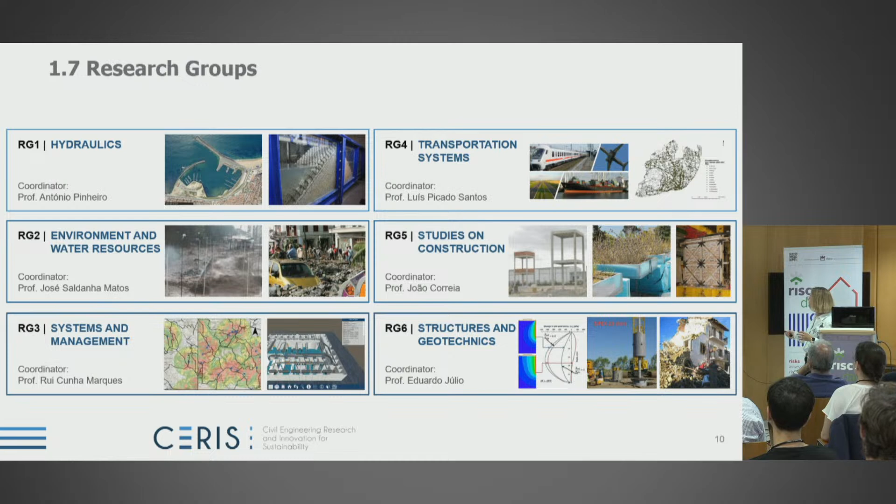We are organized as members, collaborators, students and grant holders, and each of us belongs to one single research group. They have different sizes - the largest one is studies in construction, whereas the others are more or less the same size, with the second largest being structures and geotechnics.

Then we have the 4 thematic strands. These thematic strands were thought of when we applied for the last FCT funding, and this was the best way we could define our research. Nowadays, we believe we have to revisit these thematic strands and eventually replace some of them with other concerns of our society, such as climate change, digital transformation, or energy concerns. We need to revisit this, and we will create a task force inside CERIS to think about how to organize and present our research in the next application.

So this is what we currently are. These thematic strands cross-cut the research in the six research groups. I myself am not just focused on one of them - I'm split among one or two thematic strands. For instance, my research is very much focused on risk and safety, but I also work in response to societal changes, and other researchers work the same way.

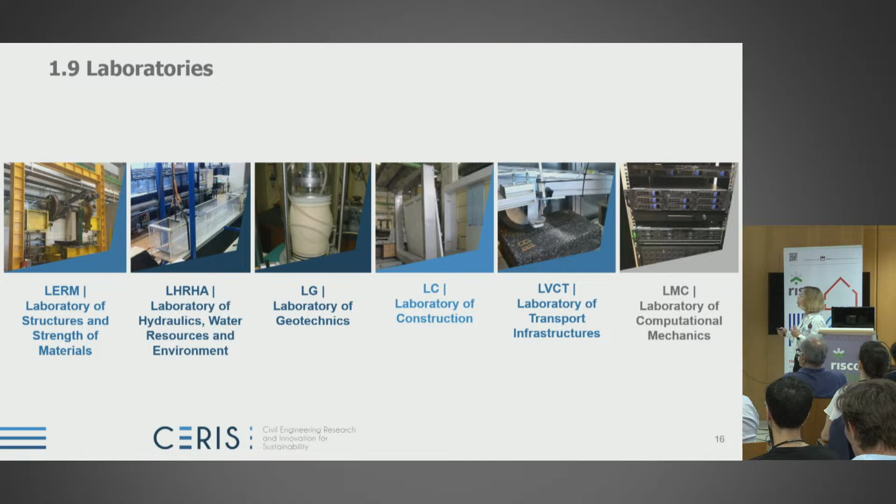Then we have our experimental and computational labs that support our applied and fundamental research. We have 5 experimental labs: the Laboratory of Structures and Strengths of Materials, Laboratory of Hydraulics and Water Resources and Environment, Laboratory of Geotechnics, Laboratory of Construction, and Laboratory of Transport Infrastructures. Probably you know them, you have visited them. You're very welcome to come and visit, and we can share our facilities with our colleagues. We also have the computational mechanics lab that has servers and gives support to numerical modeling in our center.

Last year we created 2 hubs of CERIS. The first one is Nova Hub. Actually, the researchers that belong to Nova Hub were already, most of them, CERIS members and collaborators. But because they represented a significant critical mass, around 25 to almost 30 people, we found it fair to create this hub in Nova School of Science and Technology. It was created in February 2022, and Rodrigo Gonçalves is now the coordinator of this hub.

We also have another hub in Coimbra.

This hub was created in April, two months later, and we believed that this partnership with them allowed us to reinforce the connection with industry, because they do lots of applied research and consultancy with industry. They have extraordinary laboratory facilities, space, and different installations and equipment from ours, because they have much more space. You can see the space here in Coimbra. Itecons has got all this.

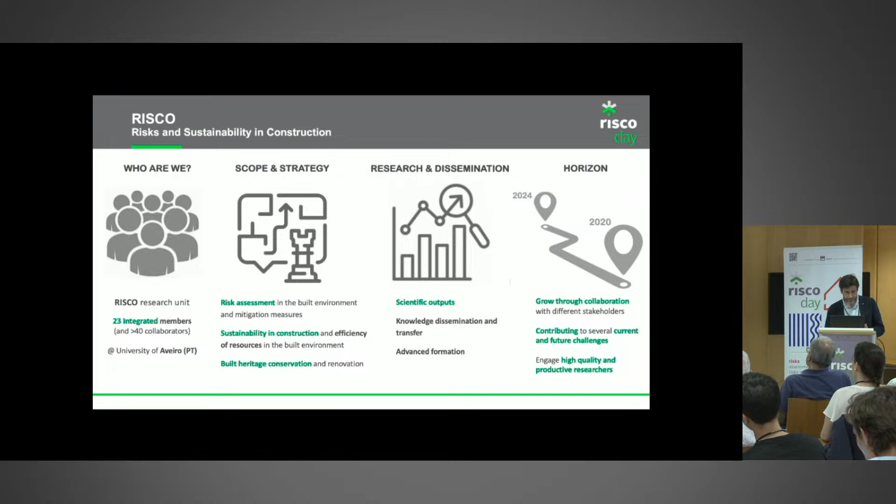So who are we? We're a small research group. We have 23 integrated members, but we have over more than 40 collaborators, including PhD students and doctors. We're actually in a very interesting ecosystem here at the university, where we have 16 departments and another 4 polytechnic schools, and an environment of 20 research units, all of which have been rated very good or excellent.

This ecosystem is very interesting because we have the opportunity to interact and have an interdisciplinary nature. As I said in my first intervention, last year we had 3 research units here, and this year we will have the participation tomorrow morning of another 5 research units. These research units have some research fields of common interest, and that's why this event is important to bring us together, even though we're in the same house and don't always know each other. So the idea is to continue this strategy of internal dissemination and interact more actively with other research units inside the University of Aveiro.

Our RISCO unit is in the civil engineering department. I would say that the civil engineering department is kind of like our nest, okay? It was created in 1996.

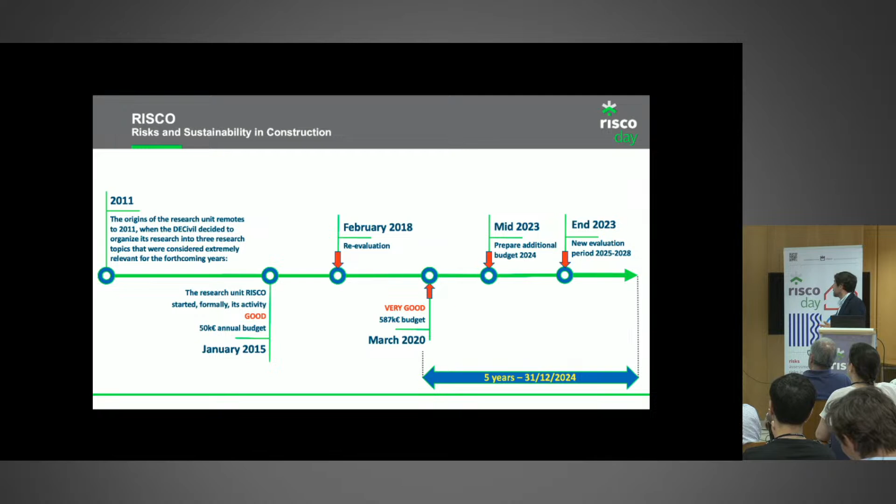Just to give you an overall idea of how we were created: we started formally our activity in January 2015, then got reevaluated in March, and we had a slow start on the execution of our budget. But 2 things are very important here: we have to prepare an additional application for a budget for 2024, and in the last trimester of this year we will be reassessed. Next month we will have this. We'll have to prepare this additional budget, and in the last trimester prepare our reassessment.

Our external scientific advisory committee is here today. I won't be presenting them, you've had lunch with some of them, so it's a pleasure to have you back. It was very interesting, our meeting this morning, because of the recommendations given, and as you said this morning, and I retain this phrase, you're coaching a good student. So RISCO research unit is a good student, and it's easy to coach good students, like good PhD students, right?

As I said, we're over 60. So we have a good percentage of women in our group. We have 30 active PhD students, actually a bit more, but these are the active ones that we keep a trace of, and we know that are working and are supervised by RISCO members.

We had a pickup on the PhDs that were concluded in 2022. You can see there were 5 of them concluded last year, and in this first trimester we had another PhD concluded. It's very interesting to see that our students, our PhD students, are mostly foreign students. This is something that I think is common in other PhD programs.

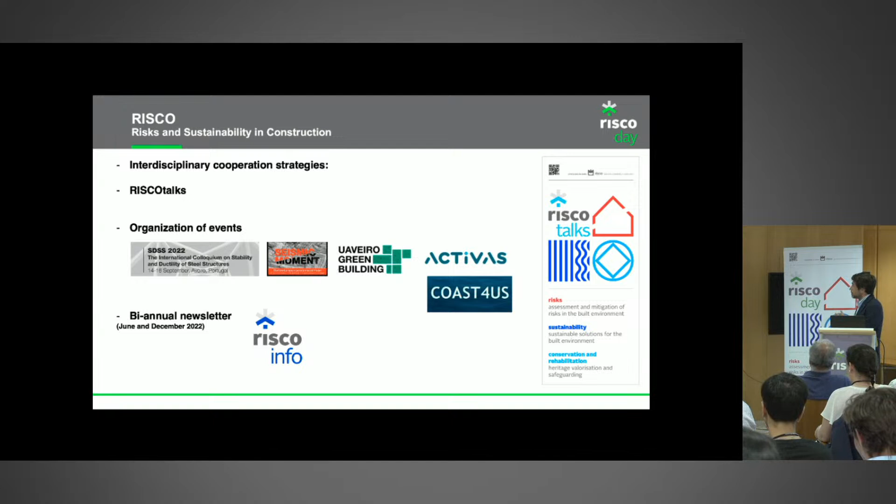So budget-wise, just as Dídia told us, it's broken down into 2 strands or two streams, a base and a programmatic. Just to stress that altogether, we, since the beginning, agreed on having a good investment in human resources, because that's where the production line is of papers.

It's exactly in good human resources, in PhD students, and in PhD researchers. So we have a very good share of our budget dedicated to human resources. Then we have another important slice dedicated to equipment that we bought. This equipment has potentiated a lot of work with PhD students. You'll see some of the presentations from RISCO members use of that equipment to potentiate new areas of research and to help in the research programs of PhD students.

We also had 2 scholarships that were only attributed this year, in the beginning of this year, under the scope of our funding from FCT.

In terms of infrastructure, we have a heavy lab on the ground floor of the civil engineering part, a lab on the 2nd floor, and a fire lab in another building at the university campus. We also have open space rooms for our PhD students and grant holders.

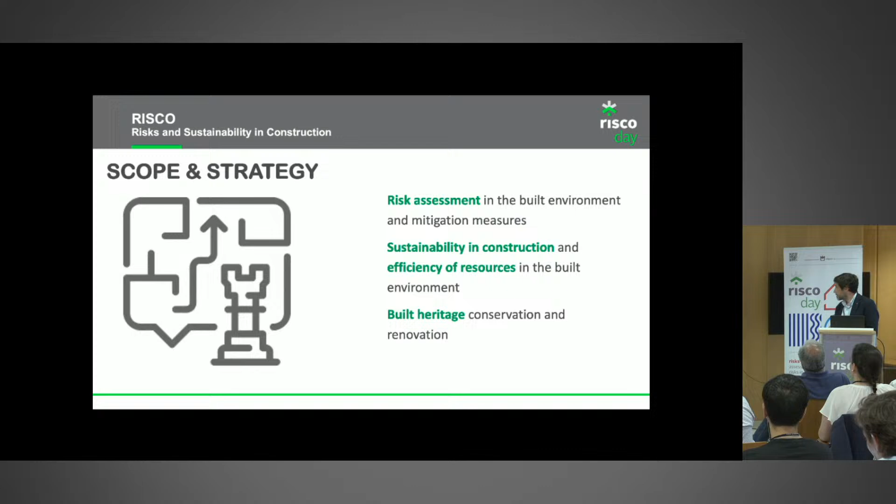In respect to our scope and strategy, we have three main research areas: risk, sustainability, and conservation of the built environment. RISCO focuses on promoting sustainable and resilient cities through safe, environmentally friendly, efficient, durable construction infrastructure across various areas, from new technology development down to smart transport and energy efficient sustainable mobility.

These strategic areas link most strongly when we talk about risks to natural hazards, and to anthropogenic, or man-made, hazards. We have a lot of scientific output in this particular research area, as you'll see in a moment.

Then we have a second research area, sustainability in construction, where a lot of work is being done on material science and the efficient use of natural resources, as well as energy efficiency and water use, and this recent problem of housing and prefabrication and the need for more durable housing.

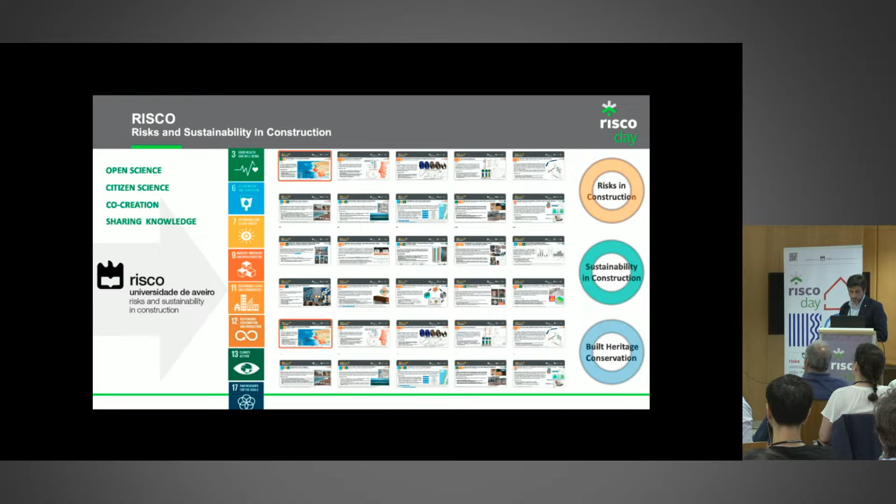Our research areas are aligned with the present challenges today, but we always have to rethink because of new calls. These calls more or less mold the way we look at our research lines, and we're always trying to understand the alignment between funding streams and our important research areas.

In terms of scientific output, let me give you some numbers, just like CERIS also gave. We've evolved over time, increased the number of members, have more active national and international projects, more active PhD students, and our number of journal publications is more or less stable, talking about article review type publications.

Where are we publishing in this period? Looking at this, obviously a lot in engineering, but also a lot in earth and planetary sciences, environmental science, material science, and energy. Particularly interesting is social sciences, which comes into any type of call nowadays, the inclusiveness of results and making a better impact on society.

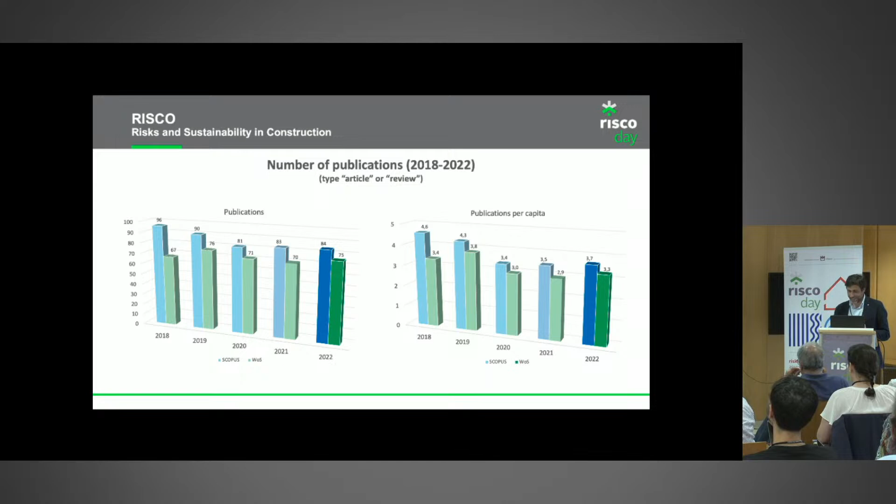Everything that's countable should count, and sometimes things that don't count should be accountable for, but we know that numbers are numbers. A very interesting indicator we looked into this year was to understand, just looking at the Web of Science papers, where we are published in terms of journals with impact factor.

So it's very surprising and interesting to see that we published more or less 50% of our papers in 2021 in journals with an impact factor over 4, which is very important. Obviously impact factors go up over time, but you can see we have a nice percentage of papers above an impact factor of 4.

So obviously quality is important in terms of our scientific output. We talked about this also this morning.

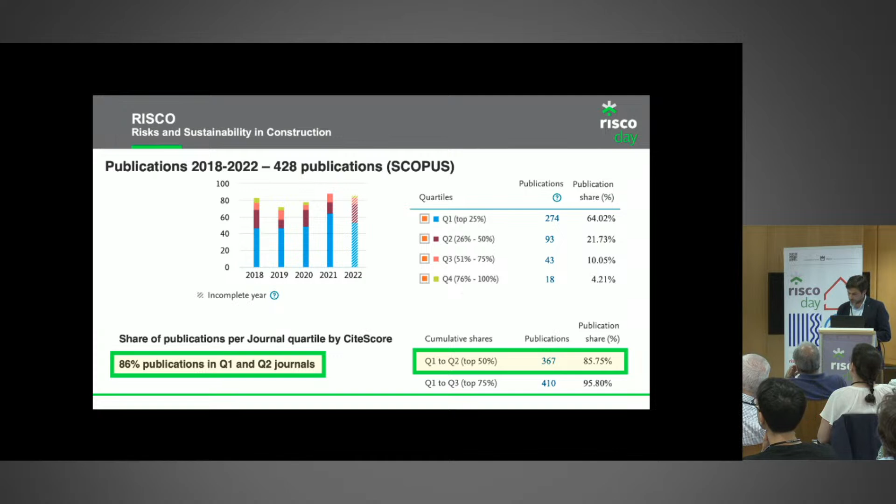In terms of share publications in Q1 and Q2 journals, we have around 86% of our publications in Q1 and Q2, which is a very nice number, in line with what we just saw for the impact factor. Looking at the share publications of RISCO in the top 10%, we have in this period 16.2% of our papers in the top 10% most cited.

Looking at the CiteScore, not other indicators like SNIP or SJR, 34.2% of our publications in that period are in the top 10% journals. And we have around 39% of our papers in that period co-authored by researchers from other countries, which is important because internationalization matters for the future of a research unit.

This was a very difficult task, which we do every year, this difficult cataloging of all the papers we had between 2018 and 2022.

So we see most of our papers focus a lot on this research area, which is risks in the built environment. And looking at the prominence topics of Elsevier and from the SciVal tool, we can see there are some papers that actually engage and interact across these areas.

It's important for us to keep track of this, because having 2 or 3 research lines, it's important that this is leveled out and we're always looking to level and have the same impact in our 3 research areas. As you can see, conservation renovation is going a little bit behind, so it's always important to monitor over time where we are in terms of publications across our 3 research lines.

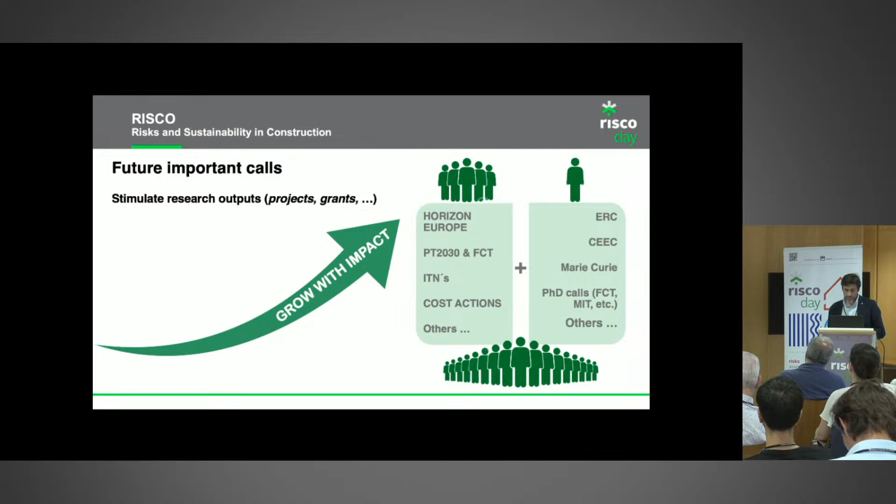As I said, I'll finish off exactly as I started. We have to grow with impact, and the only way of growing with impact is having more highly qualified and very engaged researchers. We're always looking for having researchers in these top calls. I can tell you that from year to year, we always have someone running for an ERC in our group. It's a small group, but even so, we always have someone running for an ERC, and someone running for a Marie Curie. So this is important for us, because there's ambition inside the group, and it's stimulating for all of us.

So that was very quick. I wanted to say much more, but we have so many people to hear today, so thank you very much.

While we're switching computers, I would just like to say that now in this panel, where we have presentations given by researchers from CERIS and from RISCO, maybe you can start off with someone from CERIS, Mario, and then afterwards someone from RISCO, sandwiched between.

Oh, here's Silva. Okay, thank you.

Good afternoon everyone. We will have these mixed presentations because the CERIS and RISCO coordinators behaved quite well and delayed the program by 20 minutes. Both of them. And so the CERIS and RISCO researchers are going to behave even better and make it in 5 minutes what they have to say. Keep your questions for the end, because the idea is this presentation should raise questions for you.

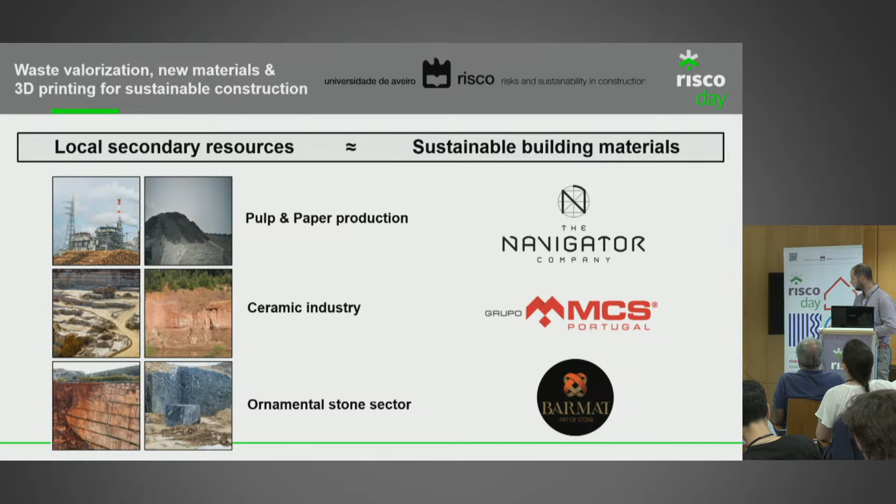For the second driver, spend our resources wisely, we wanted to use technology that is efficient, sustainable, and applied at the material design level. We have been working with low clinker cements and also alkali activated materials.

We have developed different formulations using the wastes that we identified as fillers, as supplementary cementitious materials, as precursors for alkali activated materials. This also applies to the product manufacturing level, where we selected additive manufacturing and 3D printing particularly as the production technology we want to research and investigate. We acquired a medium-sized 3D printer and have been working with it ever since.

Having identified what materials we want to valorize and the technologies we want to use, we set up a mid-term plan, so we have more or less a guideline to our research. The first step was to master the 3D printing technology that was new to us.

So we design new materials, investigate the rheological properties, control the extrudability, the buildability, the workability retention, start to print some simple objects, and then improve the quality of the printed objects: the geometric conformity, the accuracy, the finishing quality. Once we master this, we want to steer what we find to two different market segments: the heritage and building conservation segment, and new building elements.

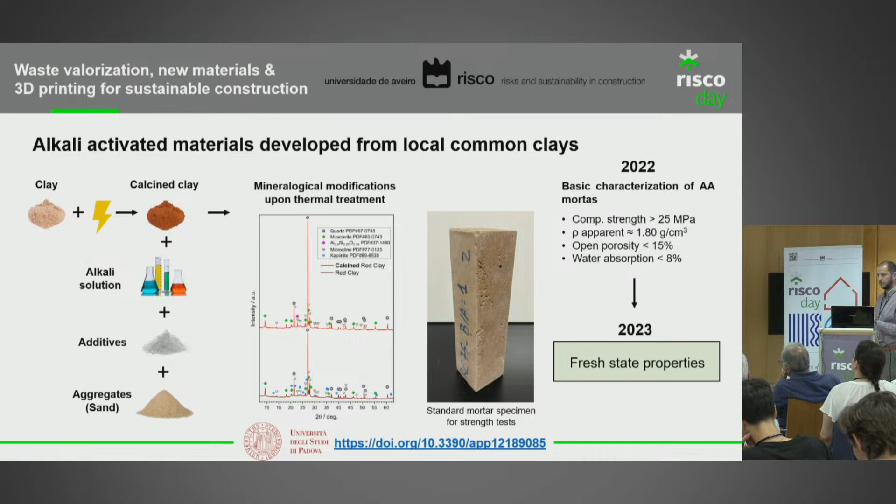This work will be extended throughout 2023. We'll investigate the fresh properties and eventually go to 3D printing if the materials correspond as we wish.

The second work I want to mention is the development of low clinker cements, and here we tried a different approach than what is typical. We looked at other research fields that use multivariate analysis, principal component analysis, and then worked with the University of Padova to try to develop new mixtures based on statistical analysis.

Once again, we keep ourselves to very simple properties that are fast to measure and quickly give an idea if the models are responding or not. The overall concept is to prove this approach works, and then we can apply it to the development of materials for 3D printing.

On top of that, we are working in a more classical approach: performing rheological studies with different materials. We have engaged partnerships with different universities on different thematic projects for different wastes.

With the Madeira University, we work on biomass ashes because we have a similar regional context, and they have available ashes there. We also agreed with the University of Santa Catarina in Brazil, and also on ornamental stone waste with CICECO, which is an internal collaboration here at the university level.

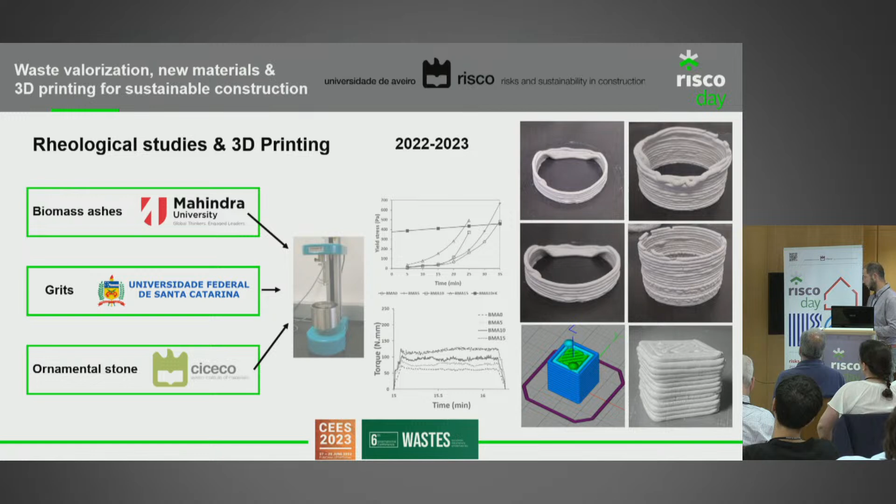This was the first printed object that we did, but we want to steer this to building heritage. So we are trying to engage with other colleagues here from RISCO, Hugo Rodrigues and Inês Bourgeois, and also undergraduate students and Prof. Vitor, to try to conceptualize how we can use this technology to replace or substitute some missing elements. But before starting with very complex structures, we want to show at a conceptual level that it works.

So we cut a cube there, so there is a missing part.

We model the part, build the missing part, then we print it, and then we see what were the best formulations to print this particular shape.

Now the objective for the next years is to get more complex structures, and Inês is already working on the digitalization of these more complex elements. Once we are satisfied with the quality of the printing that we get, we want to go for more complex structures that for us have higher value than a very simple structure like this.

So of course that is just a conceptual demonstration of the concept that we want to put forward. Inês will talk a little bit more about this, I guess, and my presentation is just that.

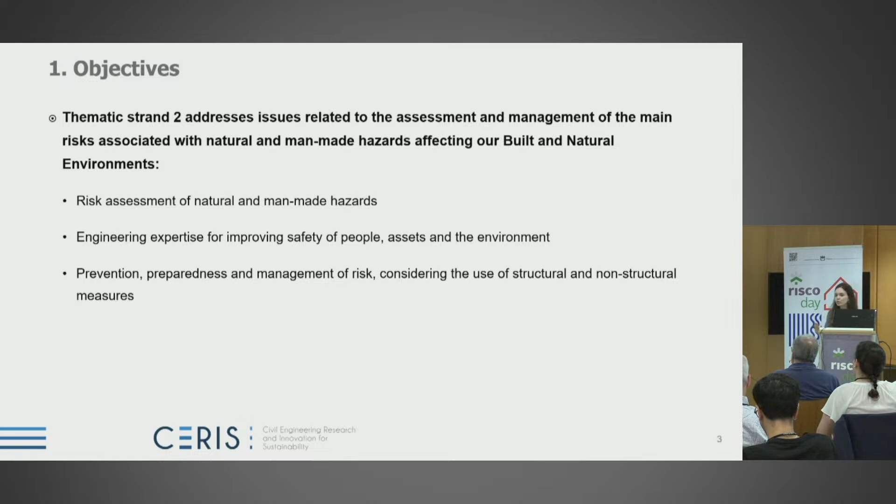In terms of main research areas, the first one is developing innovative approaches, tools and solutions to answer the future challenges of society, for better assessment, mitigation and communication of risks associated with natural and man-made hazards.

The second main research area is developing safer, better dynamic performance and low maintenance infrastructures, including from buildings and bridges to water and gas supply systems. Finally, the last main research area is planning of human activities and of resource location to have more resilient communities developed in the built environment.

So in terms of type of research, we can define 3 different types. The first one is experimental studies carried out in civil engineering labs, including full-scale tests such as fire tests of composite beams, to small-scale tests, namely local scour of bridges, pillars, and also the flow dynamics of storage tanks.

The second type of research is field measurements in real-life infrastructures, meaning seismic geophysical tests, water quality tests, pressure transient tests in pumping and hydropower systems. These are just some examples.

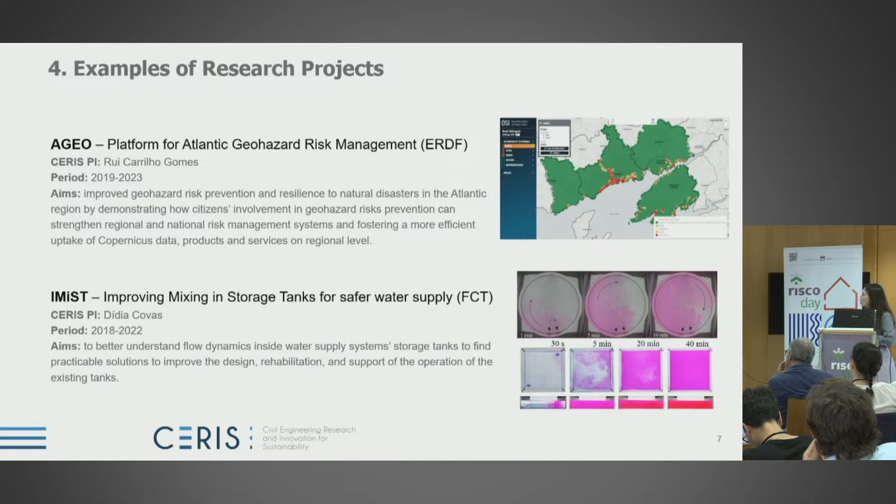Other two examples - the first one is an ongoing project coordinated by Professor Fernando Branco and researcher Mário Artur, titled New Fireproof Dwellings for Wildfire. The aim of that project is to protect new dwellings from wildfires using the concept of a fireproof envelope facade with existing commercial non-combustible materials.

The last example is also a national project, concluded in 2021, coordinated by Professor Rita Bento, titled Framework for Seismic Risk Reduction Resorting to Cost-Effective Retrofitting Solutions.

Regarding the people associated with this thematic strand, we have a lot of people somehow associated to it. Above 76%, we include more than 50 people. Between 51 and 75%, we have more than 10 people related to this thematic strand. And with a small percentage, but still with influence in this thematic strand, we have around 150 people.

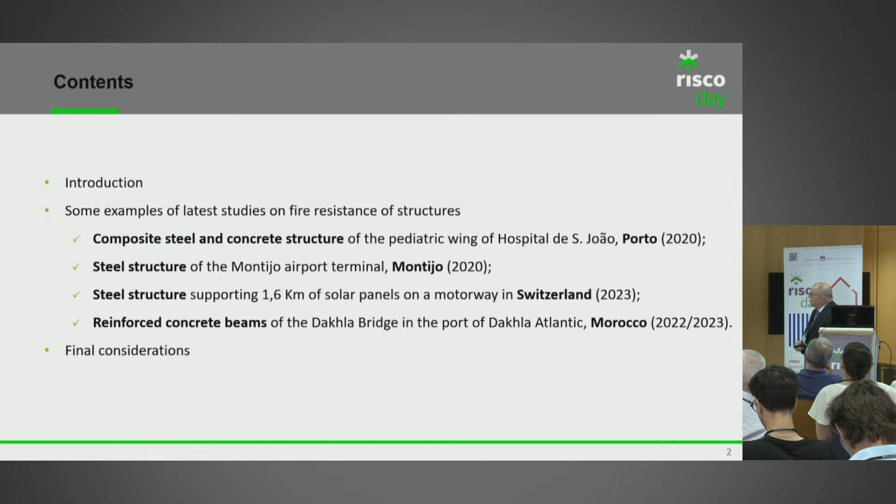Just to have an idea what we need to do for this type of studies or analysis: we have to define the fire scenario. There are 4 steps. First, define the fire scenario. Second, define the mechanical loading. Third, calculate the temperature within the members of the structure. And last, evaluate the mechanical behavior of the structure that has been exposed to the fire.

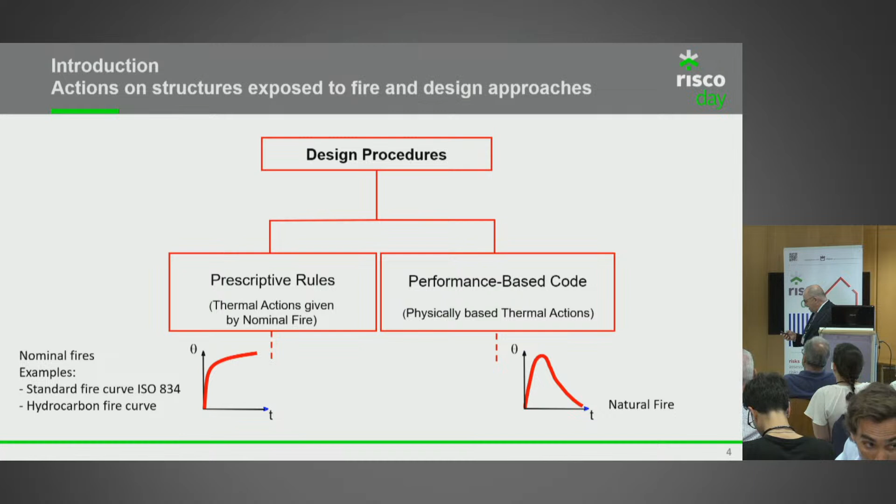Just to have an idea of what type of fire scenario we can consider - on the left hand side we see what we call the prescriptive approach, using nominal fires, which are very simple curves to define the heating resulting from the fire. On the right hand side is what we call the performance-based approach, using natural fires. Eurocode 1, part 1.2, allows the use of this type of natural fire. So, okay, this was the very short introduction.

Now the 4 examples. This one... doesn't work. No, the laser - the laser is in the middle.

So this is the hospital of São João in Portugal, and this is the expansion for the pediatric area. We have done the evaluation of the fire resistance for the standard fire curve. This is one of the nominal curves, and the fire resistance needed was 2 hours.

Here are the numerical simulations, and we took advantage of this membrane action that comes from the big deflection that happens in case of fire. So there is a ring of compression zone in the periphery and a tension zone in the middle, and we can avoid protecting the secondary beams to allow for this big deflection.

So we will see here some examples of what we have suggested for the protection. Here the black beams are not protected and the others are protected. The blues were protected to a critical temperature of 650, and the red ones also for 550 degrees C. Here is an example of numerical simulation for the temperature field in the slab after 2 hours of standard fire curve exposure.

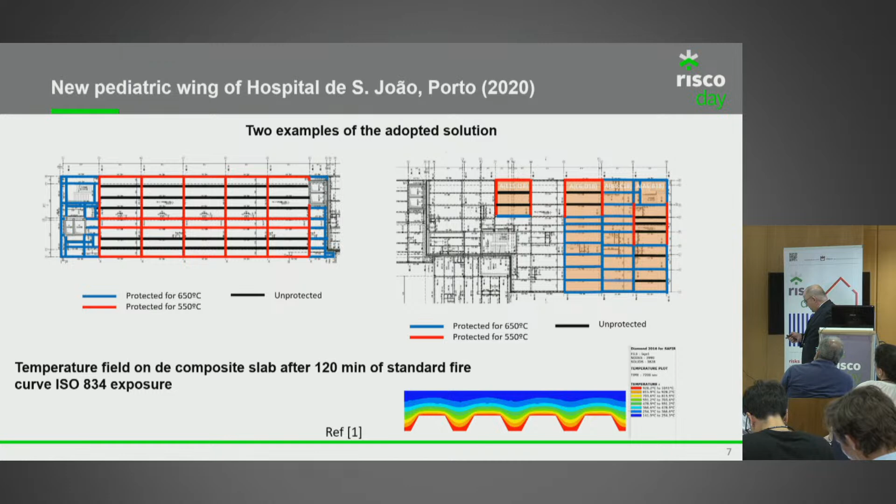The next one is the steel structures of Montijo Airport Terminal. Again, we needed a fire resistance of 2 hours, and the fire scenario that we used was the natural fire curve with software that allows for 2-zone models. I will not go into details on localized fire.

I just want to show the examples of what we have done, not enter into details. So here are the several scenarios in several parts of the building, the main terminal, and here we have 2 piers that are linked to the main terminal by 2 bridges, and we have also studied this part of the airport.

So here you can see the natural fire, a fire with an increasing phase and a decreasing phase, and we have proved that in this case the steel temperature doesn't reach the critical temperature.

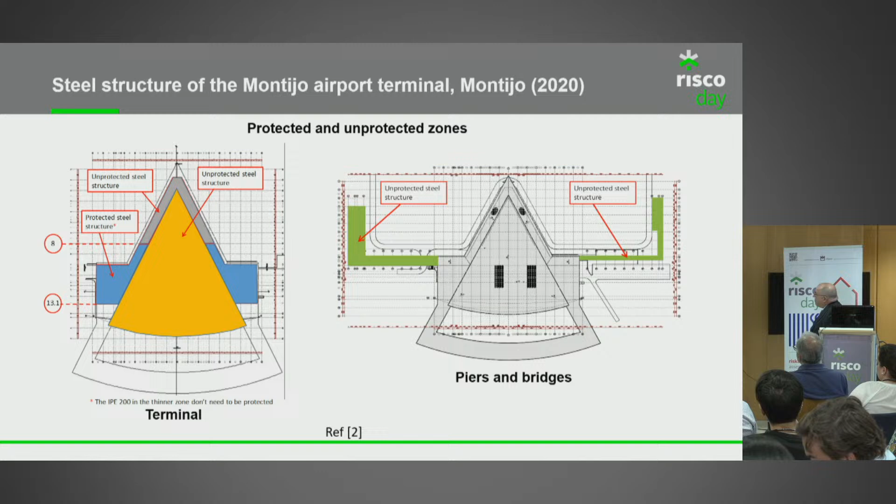So examples where we don't protect any steel structure, the only zone that we have protected is this blue zone.

So this is the example. The third example is this portal frame that will be built over 1.6 kilometers to support solar panels along this length over the motorway.

Again, we have used natural fire, obtained with this software, FDS. This was not made by us, it was evaluated by another company, and we just used the temperatures to evaluate the behavior of the steel structure. The idea is that this structure doesn't collapse during any phase of the fire.

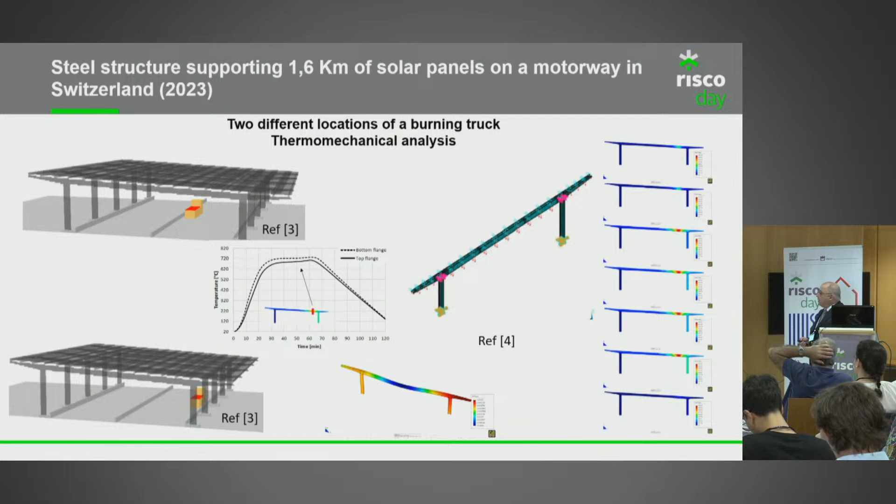So what are the scenarios they sent to us? A burning truck here in the middle, and a heavy burning truck close to the columns. This is the temperature that we received from the company, and we used these temperatures to evaluate the behavior of the portal frame. This is one of the deformed shapes of this portal frame, and we have proved that there is no collapse during any phase of the fire.

The last example is a bridge in Morocco, linking the port and the company. You can see here, this is the port, this is the bridge, and each span is 25 meters. Because in this bridge there is an oil pipe, the owner asked us to evaluate the behavior of this mass-loaded beam due to the pipeline, when submitted to a fire given by a hydrocarbon product.

So what we have done is, this is the fire curve that they wanted us to use. In the first study, we considered normal weight concrete. Here are the fire scenarios: fire on 2 sides, 3 sides, and 4 sides.

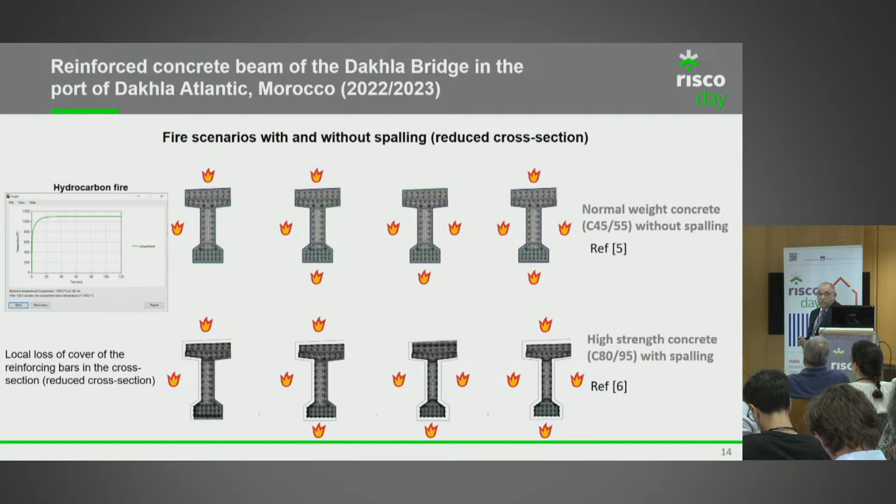Later, we made this report, and they asked us to consider high strength concrete. In this case, we should also consider the possibility of spalling. So if you compare the cross sections here, you can see there is a loss of cover, and the cross section was reduced due to the detachment of the concrete.

So here is the temperature field. On the left side we have the gross cross section, here with the spalling, with these two temperature simulations. Here is the deflection without spalling, and here with spalling. And we proved that we can reach a classification of 30 minutes of fire resistance with hydrocarbon fire.

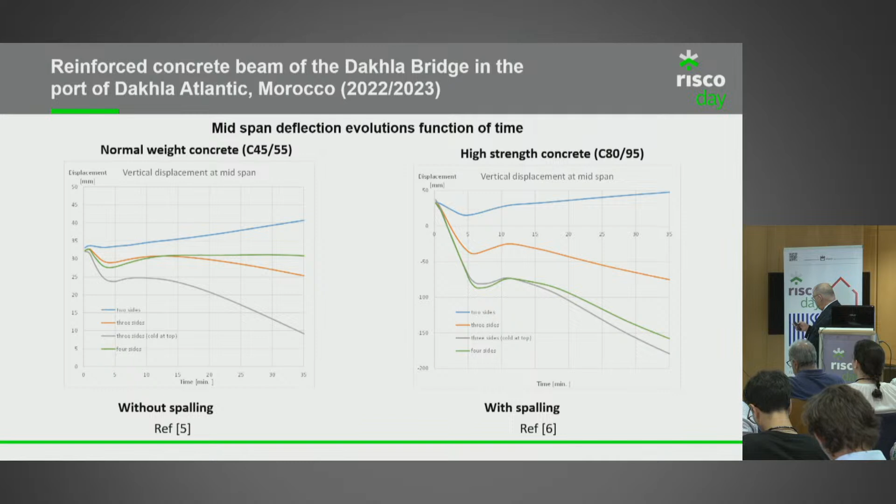Okay, just to finish, what I have shown is we have used several different fire scenarios: the standard fire curve, the hydrocarbon curve, localized fires, natural fires, and also in these four examples several types of structures: steel structures, composite steel and concrete structures, and concrete structures. Here are the references to our reports. Thank you very much.

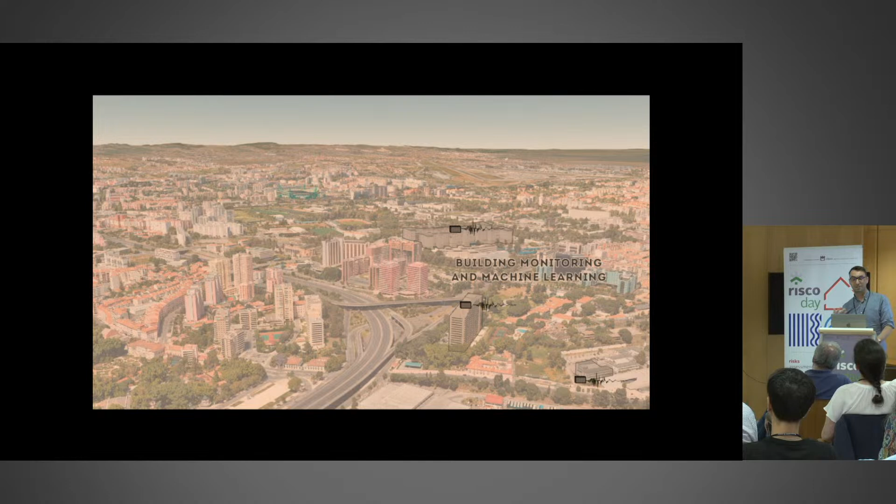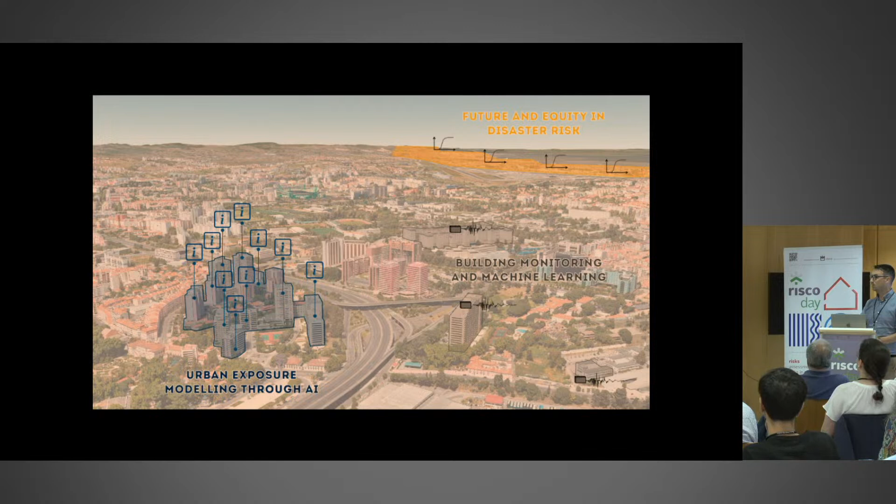We've been working a lot on basically building monitoring and machine learning, trying to do risk assessment and vulnerability in a different way. Also using artificial intelligence for urban exposure modeling. I will show an application actually to Lisbon. But obviously a lot of this research is useful for all natural hazards, not just earthquakes. And then finally, looking a little bit at the future, in particular in parts of cities a little bit more on the outside that are expanding, and how do we think the cities are going to look in the future. This is obviously very much aligned with the 17 United Nations Sustainable Development Goals.

Just to go on the first trend, we partnered with a company in California called SafeHub. They have these new sensors. There are a few other companies in the world that also do this, but the sensors are very low cost. They're quite cheap. You can install them in anyone's houses, and they capture, for example, the ground shaking. But it doesn't have to be just focused on earthquake shaking—we've been talking already about, for example, wind.

And obviously, if we have information at the base of the building, we can do better risk assessment. But that part is actually not that disruptive, let's say. What we've been doing a lot is trying to assess actually at the top of the building. Every time a building has damage, regardless if it's due to earthquakes or other causes, usually we have an elongation of the period because there's damage, there's loss, we lose some of the stiffness on the buildings. We verified this, for example, in the earthquake that happened in Spain. So if we see that there's an elongation of the period, there's some damage. But now let's try to establish a very good link between the different dynamic properties of the buildings and how much damage we expect on the buildings.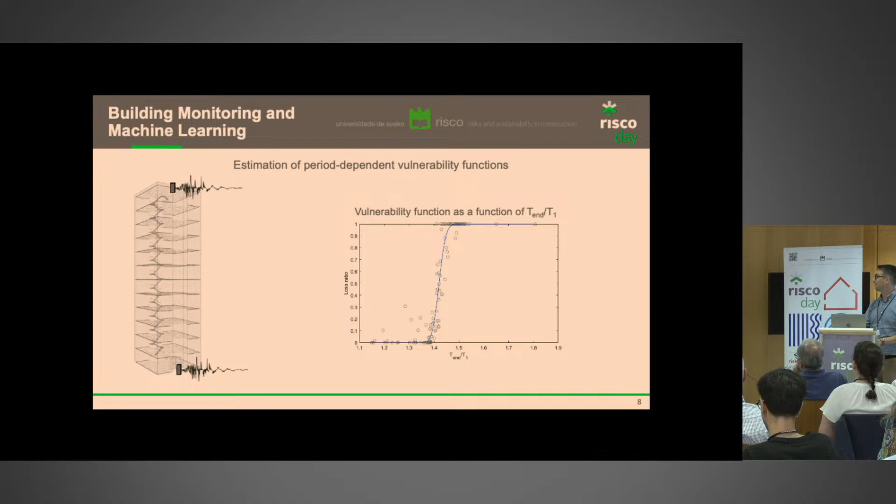We have many of these sensors already in Portugal, and we're going to be installing them in some critical facilities. We're going in May, actually, to IST. I was talking with Dídia previously about this, because we will install 10 of these sensors in Lisbon. Because we will install in several places in Lisbon, it's also possible for us to start to establish a network of sensors in addition to the sensors that already exist in the Portuguese networks in IPMA.

The goal is to establish a rapid loss assessment system. This has already been tested in a few places. But what we're trying to do is understand really strategically where we should put the sensors, considering the seismic hazard, the vulnerability of the building stock, where we have people with different conditions—for example, older people, people with disabilities—because these are the places where we need to understand where damage will be high.

Moving now to this part about artificial intelligence. Every time we do risk assessment—and actually this is not so much necessary for earthquakes, but for tsunamis or floods—we need to understand where the buildings are located. If you think about doing this at large scale, it's quite complicated for us to understand where the buildings are and also the structural attributes of the building. So using data from OpenStreetMap and also Google Street View, we built this framework that goes into specific neighborhoods in Portugal and extracts directly all the images from the buildings.

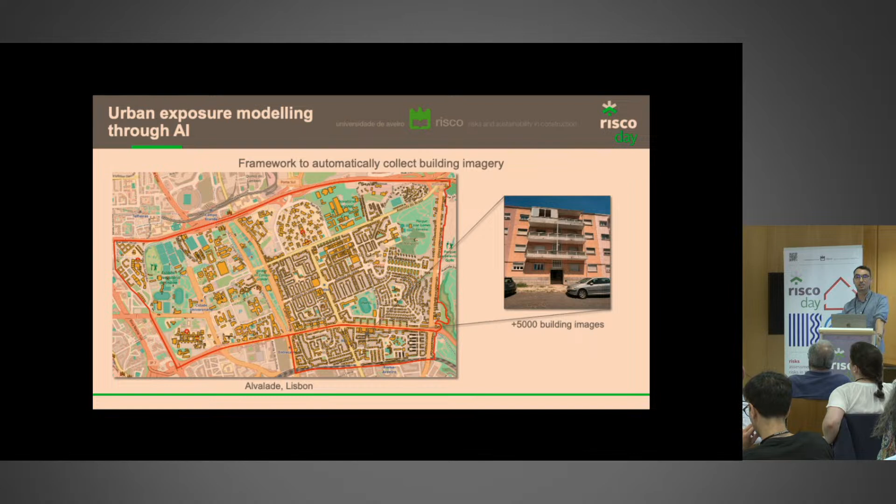Then we hired some students, some master students. This is the neighborhood in Alvalade in Lisbon. They went building by building, took photos, and also classified the buildings according to the type of construction material, the number of stories, irregularities, presence of basement. With that information, we trained this artificial intelligence algorithm with 4,500 images. Then we gave it 500 images that the algorithm had never seen, and asked it to classify these buildings. The results were actually quite good—quite surprisingly, we managed to classify correctly 85% of the buildings in this particular neighborhood in Alvalade, and we're now extending to Areeiro in the south.

This was quite interesting because we were having conversations with the City Hall in Lisbon. They wanted to apply this now to the entire metro area, because it's a way for us to get information building by building with a lot of structural attribute information, which can be used not just for natural hazards, but they were proposing to use it also for energy efficiency purposes, to understand which buildings might need not just seismic retrofitting, but also improvements in terms of energy efficiency.

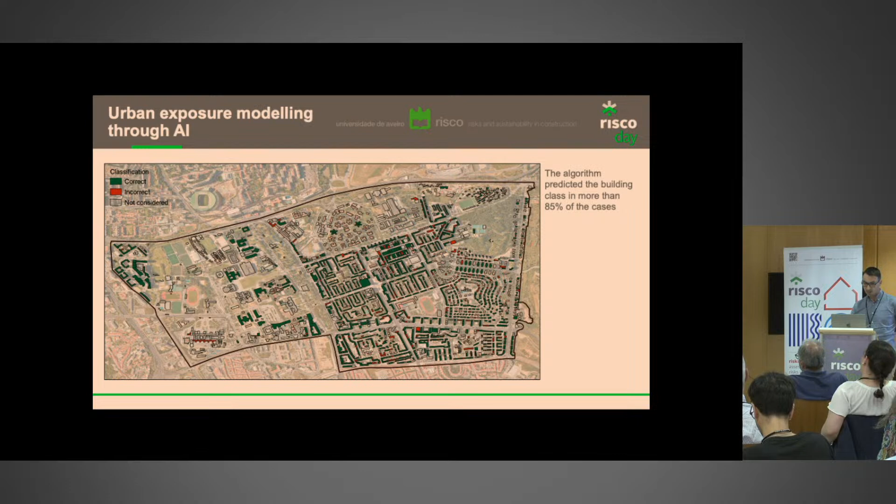The last part is about future inequity and disaster risk assessment. This is actually something that different companies and also the Science Foundation in Portugal are working on. For me this is almost a personal concern, something I've been trying to learn more about, and a few PhD students are working on this.

We know we're going to have a lot more buildings and people in the future. We just saw on the news that India now has more people than China, or is very close to it. There have been estimates, for example from the World Bank, that everything built until 1970 will be built again in the next three decades. We also noticed that for some countries in Africa, like Nigeria and Egypt, the population is going to double, and so will the building stock, in the next 30 years.

We did some experiments for places that are expanding quite a lot in Portugal, in a small municipality within Setúbal, in the south of Portugal. What we did was use satellite images since 1974, and also look at how the population increased, GDP per capita, and urban planning, up until 2020. Then we used an agent-based model to try to predict where people are expected to settle until 2050.

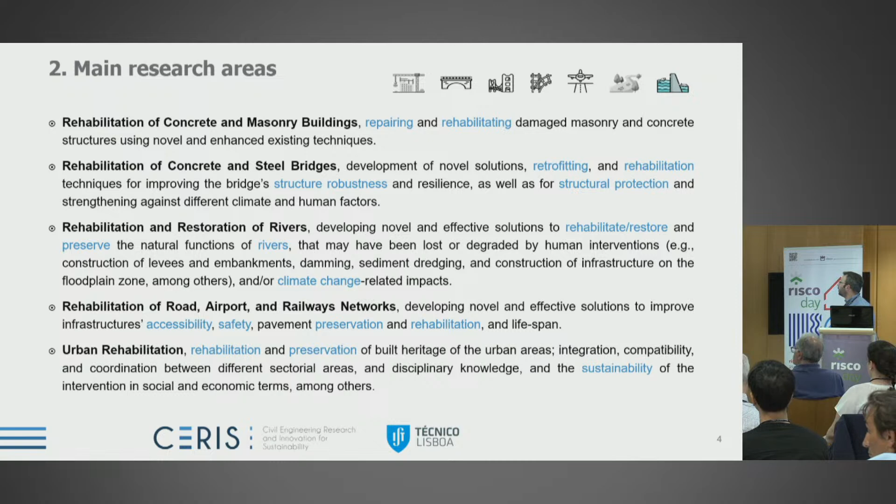The research developed within these thematic strands contributes directly to seven sustainable development goals under the United Nations Agenda 2030.

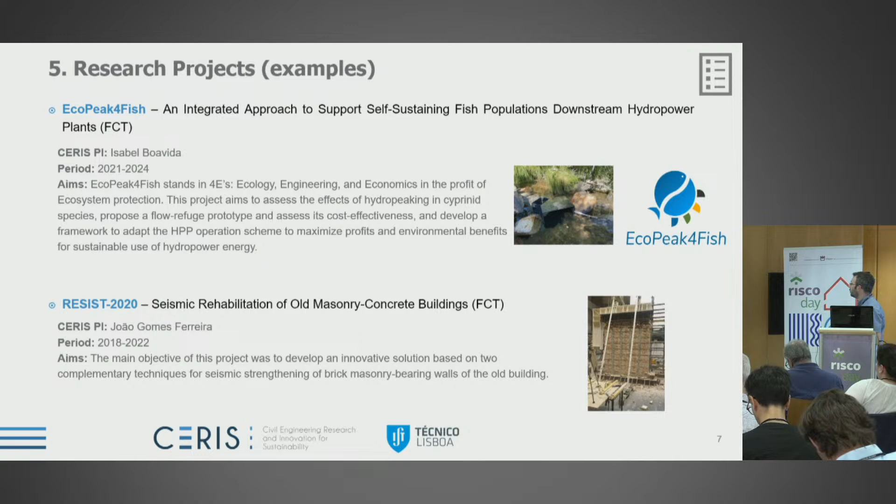Some examples of research projects in line with this thematic strand are EcoPeak4Fish, an integrated approach to support self-sustaining fish populations affected by downstream hydropower plant impacts; RESIST-2020, on seismic rehabilitation of old masonry and concrete buildings; and the Shelter project, on structural hyper-resisting elements for life-threatening earthquake risk.

Hyperslab is another project related to this thematic strand.

Regarding people, of course not everyone at CERIS contributes 100% of their work to this thematic strand, so we have categorized contributions into four quartiles. In this case, 41 people contribute only up to 25% of their work to this thematic strand, and 45 people contribute between 26 and 50%.

For 45 people, only between 26 and 50% of their work contributes to this thematic strand, and only 10 people are very closely linked, with most of their work in line with this thematic strand.

About future and ongoing activities, we are always trying to disseminate the research activities and projects developed in our center through different sources, mainly media outreach among stakeholders, industry, and policy and decision makers.

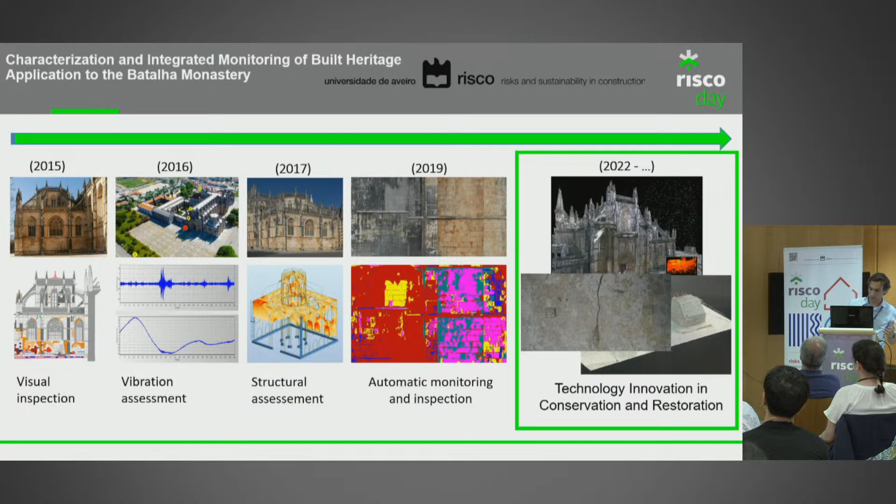Our main objectives for the next years relate to monument characterization: geometric survey, pathology survey, and non-destructive testing. Using structural health monitoring in this first stage with optical fiber sensors, measuring mainly cracks and temperature for now, and also, as Guillermo already presented, using 3D printing to develop missing elements, and digitalizing some artifacts using virtual reality for these artifacts and constructive elements. In the end, our main aim is to set up everything in an online dataset platform that can be used by different users. I will show only some images of what we have done.

For monument characterization, we have been performing a geometrical survey, mainly with Inés doing her PhD work on the survey of the monument. If you know the monument already, you know it's quite huge.

At the moment we have more than 300 scans. It's not completed. The objective is to have the online dataset platform with the geometry of the monument, to correlate with the pathology survey, to support the numerical analysis, and also the structural health monitoring system. This is ongoing work, not too much research, but a lot of work that gives us a lot of information for the future.

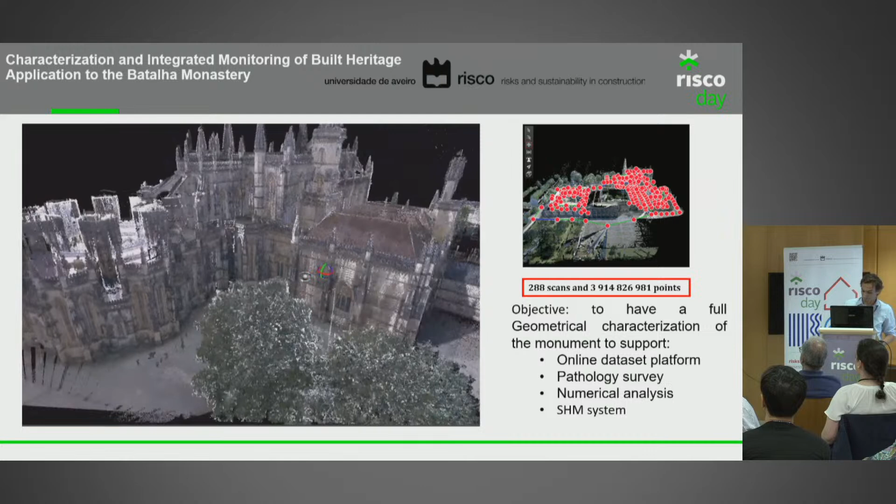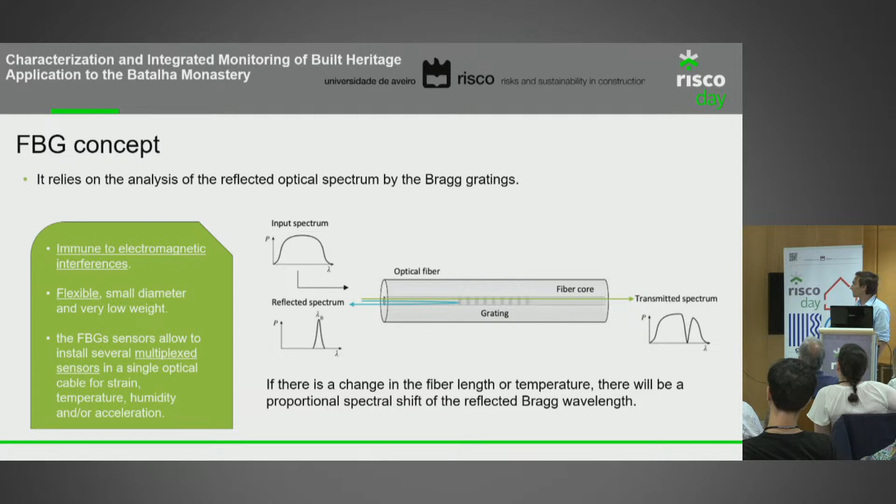The benefit of the fiber optic sensors is that you cannot see them installed, and in fact we have a lot of sensors. In this new stage we decided to implement a few more in collaboration with the physics department. We are using a common technique: fiber Bragg grating sensors. They cannot be seen, at least they are mostly invisible. They are immune to electromagnetic interference, they are flexible, many sensors can be placed in the same fiber, and they can be used in monuments.

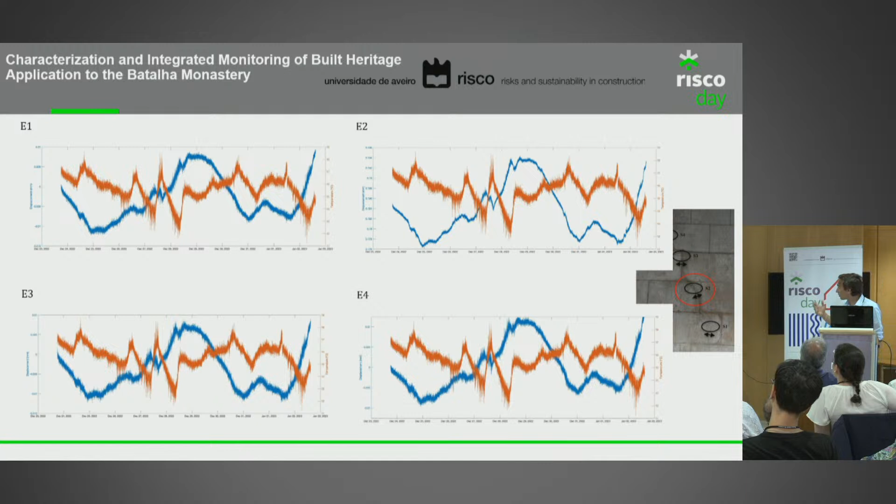We have also been doing monitoring - I won't show it in detail. We are looking for trends. In this case, we have no trend or correlation in this crack with temperature. We can already see a deformation around 0.3 millimeters, which is not insignificant over 4 months, so we keep monitoring this crack. In some other places we see 10% of this movement with a clear correlation with temperature, so this is not as significant, and we keep monitoring and increasing the sensor network.

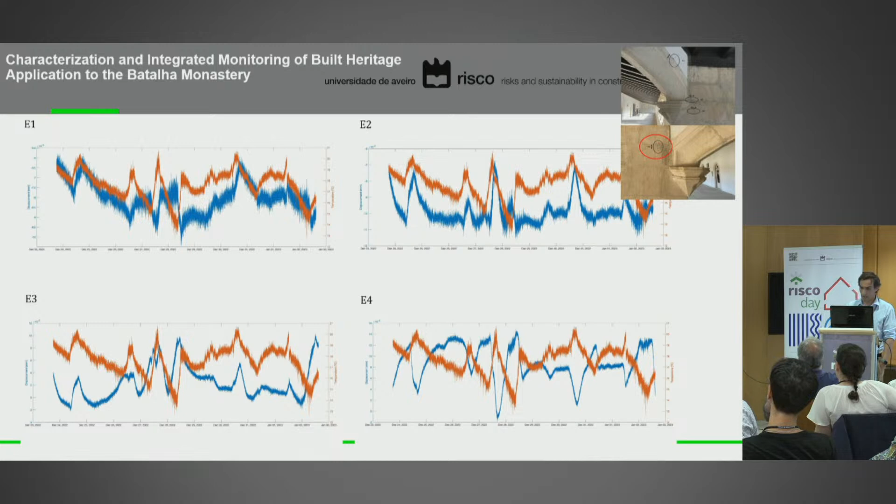Another area - I'll skip details due to lack of time - is the 3D printing that Guillermo already showed. Our main idea is to find elements that are missing and try to replace them with printed elements. One of the main issues is the ethical considerations of adding elements to heritage sites, reproducing missing elements, embedding sensors in these printed elements, studying the materials that can be applied, and the connection between old and new elements.

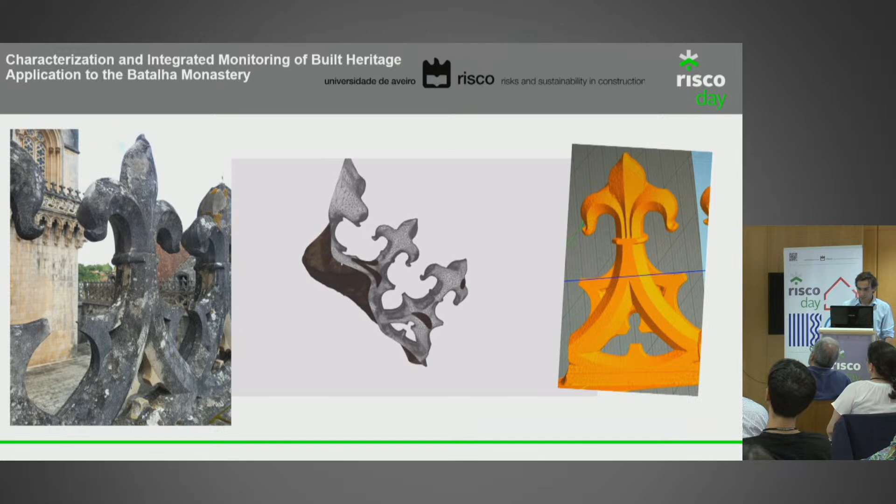As Guillermo already showed, we started this with some cubes, and we are now evolving to new shapes, and hopefully by the end of the year we will have the first more complex shapes printed. In the end, this is a side project developed with a research unit of design here at the university: the use of virtual reality as a tool for cultural sustainability, not so focused on construction.

We are using 4 artifacts and also 4 elements in the construction to pass along the knowledge about this. We are using structured light laser to develop digital elements, and then with support from the design team, we reconstruct them as they were, based on images we have from the past and information from conservation people.

What we can rebuild and add information to these artifacts and construction elements so we can participate in the education campaign, or education department, that they have at the monument. In the next steps, we will continue to explore these areas to start a numerical analysis. I hope to have another PhD student working on this topic by the end of the year. We will increase the sensor network with accelerometers, tilt meters, and others, and hopefully achieve an online digital platform with all the information.

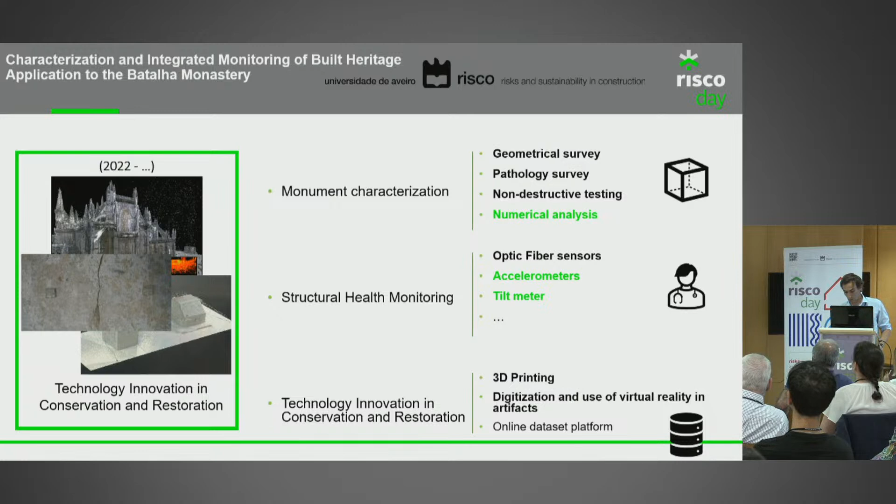Well, and that's it. Thank you for your attention.

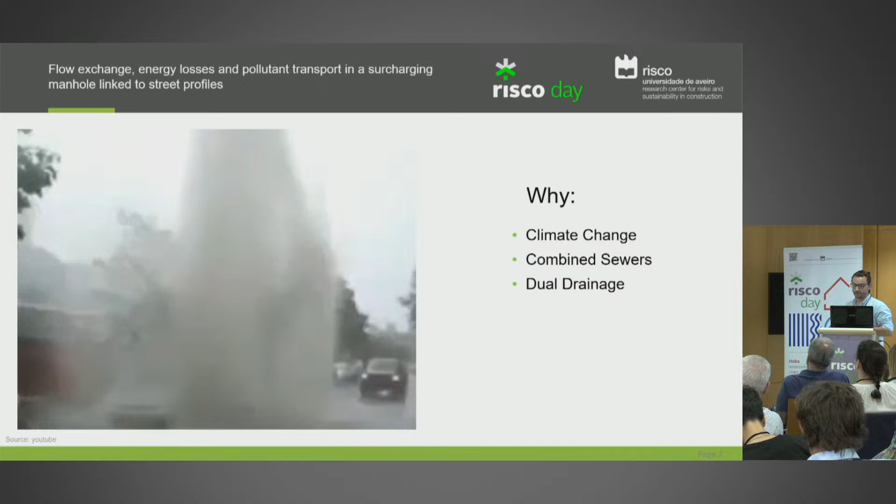Dual drainage, which is the consideration of both the flow on the surface system and on the sewer system, is often neglected when designing new drainage systems, and this is often a mistake, because we really need to start considering it, especially because our codes imply there is a limit return period, and above that the companies doing the design are often not responsible and don't care about the consequences.

In this work, I'm going to focus a little on flow exchange, energy losses and pollutant transport, which is often neglected in these situations. When we have combined sewer systems, we can have a lot of sewage ejected to the outside and to the streets, leading to health problems.

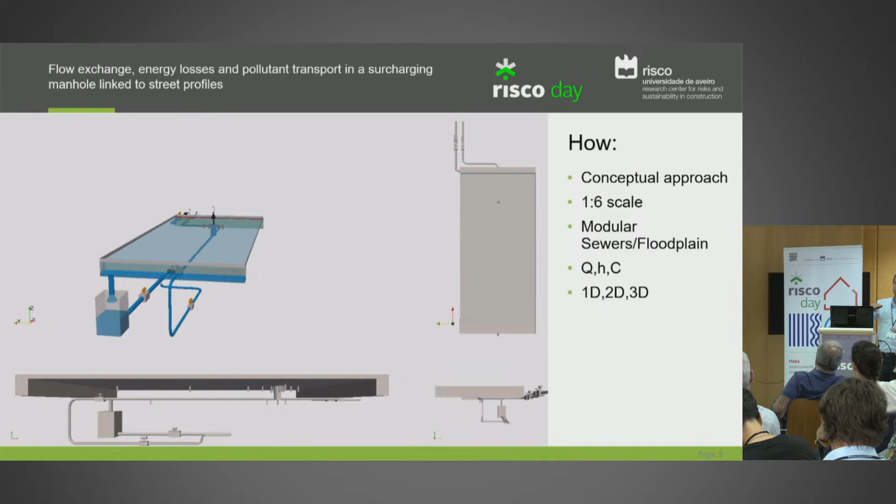Since in Portugal we have a small dual drainage facility in Coimbra, but the surface system is not as big as necessary, I had access, with some other colleagues, to a facility in Sheffield. This dual drainage facility is a scaled model, a conceptual approach, with a surface system and a sewer system, built modular so that everything can be changed, including the sewer position and the manhole position.

The transition element between the surface system and the sewer system is assumed as the manhole — sometimes this simplification is assumed in models. It is instrumented with flow meters, pressure transducers, turbidity sensors, even cameras, and two PIV systems: one 2D PIV system for the surface and one 3D PIV system for the manhole, with controllable inlets and outlets.

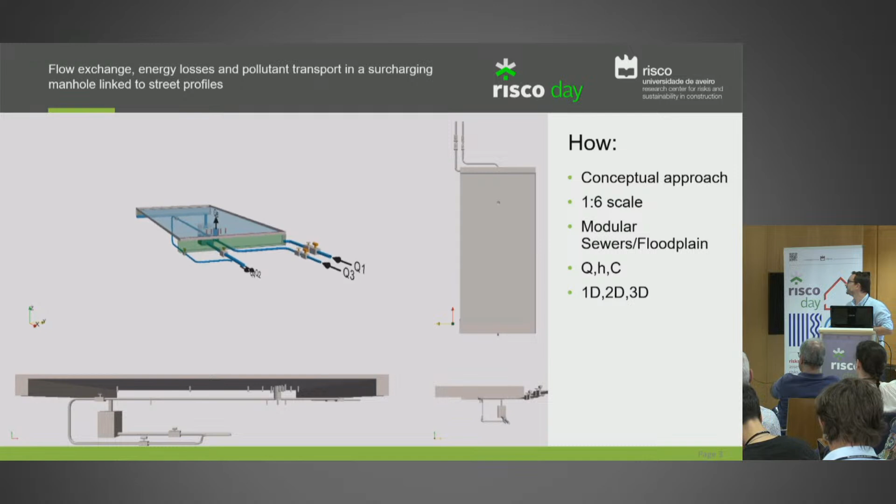So we wanted to test the influence of several street profiles on the flow exchange, energy losses, and pollutant transport. We tested 5 configurations. The first one is a simple street.

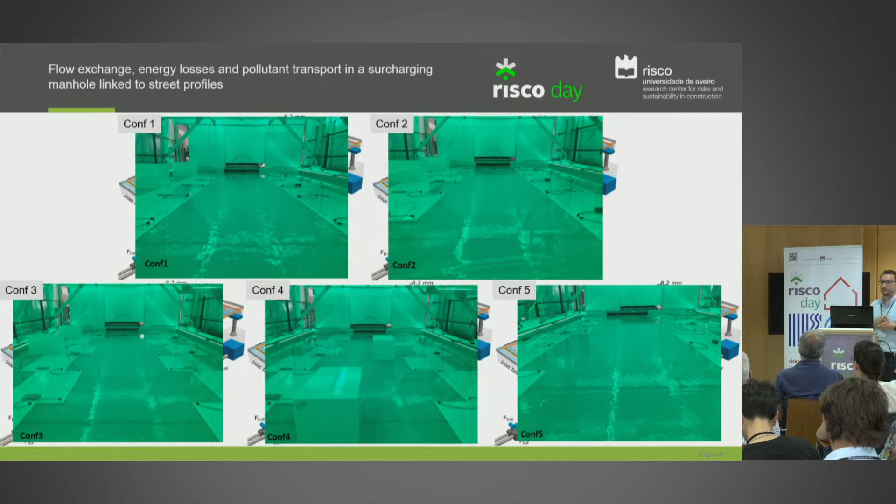The second had parking lots on one side, then parking lots on both sides, with 2 cars as obstructions, which often interact with the flow and change it, and when the manhole is skewed to one of the sides. These are photos of the facility — if you want, I can explain after, in the coffee break, why the photos are green.

So we calculated the mass balance basically using 2 flow meters — the flow inside and the flow going outside. There was no flow on the surface, so we just had the exchange from the part of the surcharge.

We calculated the energy losses through the regular discharge coefficients. Usually in dual drainage, we consider either the orifice or the Weir equation to account for the exchange of flow between the surface and the subsurface.

The energy loss was calculated based on localized losses using the Bernoulli equation, and the pollutant exchange was calculated based on a percentage — the amount of pollutant that got in compared to the amount that got out.

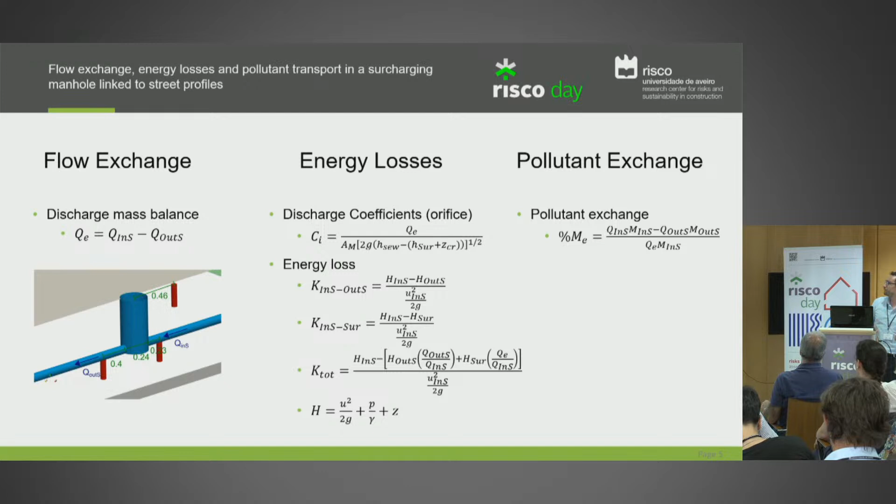So the coefficients were approximately the same. This was one of the interesting conclusions, that the slope was the same for both the wide street and the narrow streets. When we made the street narrower, the coefficient decreased a little bit. The energy losses were relatively the same. There was no big surprise.

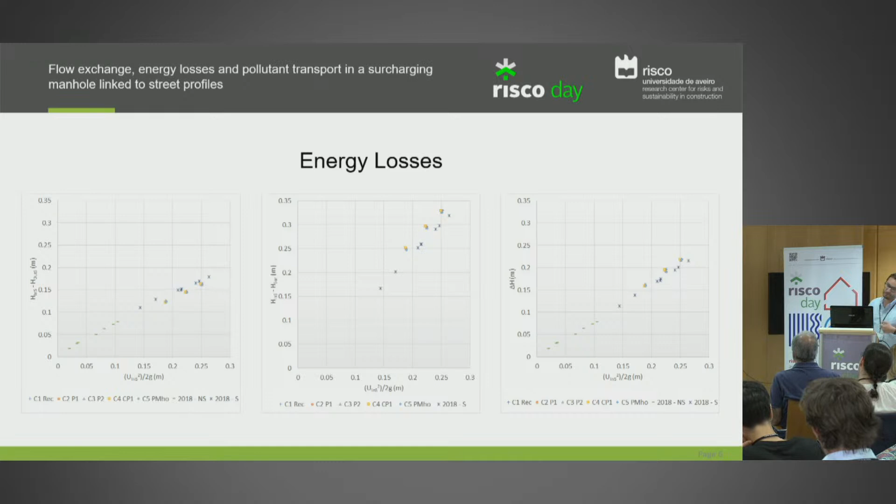The only big surprise was when we got a little bit excess of energy loss from the inlet to the outlet. That was maybe because of the increased water depth on the surface. And the pollutant exchange, although relatively constant throughout the whole exchange, because we have exchange rates from 2 liters per second to 3.5 liters per second, it's approximately the same, but there is a slight increment in the percentage of pollutant discharged.

So this was a highly complex, although conceptual, approach. There was indeed a relationship between the width of the surface and the resulting discharge coefficient. The sewer to surface energy was relatively unaffected, and the pollutant transfer was relatively interesting in that it increased a little bit. Thank you.

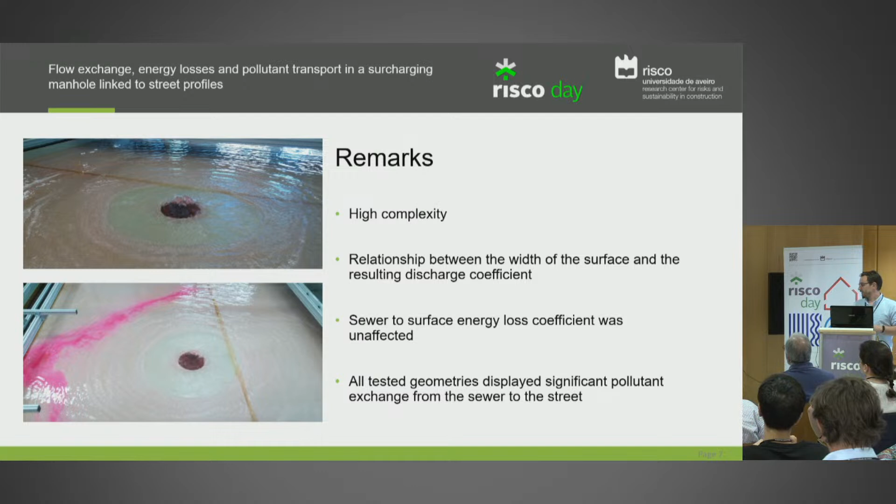Strand 4 related to societal challenges and sustainability.

Good afternoon. My name is Clara Ferreira, and the coordinator of Thematic Strand 4 is Professor Manuel Pinheiro. So today we face pressing challenges associated with natural and societal changes, and within Thematic Strand 4 at CERIS we try to develop solutions that answer those challenges that are very urgent.

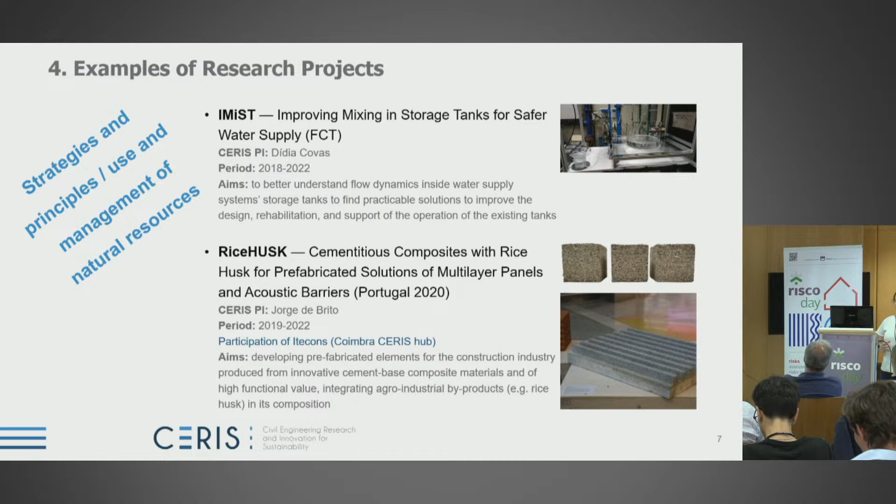We can also mention the BICLA-R project, which was developed at CERIS with Transportes Metropolitanos de Lisboa. Within this project, a tool was developed to try and prioritize investments that promote the use of cycling transportation.

Then we can also mention the Orto Aqua Salutarum project, for which the PI was Professor Dídia Covas within CERIS. Within this project, the water management from gardens of the 16th to the 19th centuries was studied to try and understand how that efficient water management could be reflected in today's systems of water management.

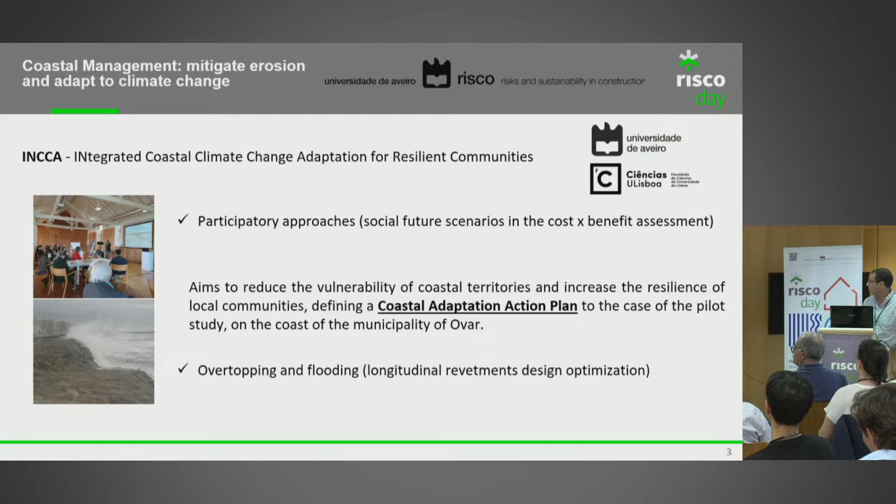It includes a lot of participatory approach, including social perspectives and also cost-benefit assessment, and improves the way we look to overtopping and flooding processes. At the end, the project aimed to define a coastal adaptation action plan for the study area of Ovar municipality.

We have discussed it with several different stakeholders, from the central government to local authorities, but also looking for academic researchers, the National Laboratory of Civil Engineering, Civil Protection, surf schools and other local community members.

We brought all of them together in several different workshops to discuss what we want for the coast, looking at different goals, for instance physical goals, if we want to reduce the area lost due to erosion, or just avoid overtopping and flooding, or protect urban waterfronts, but also looking at the economic point of view for break-even time, higher valorization over time, or the relationship between benefits and costs.

We also looked for different temporal horizons of analysis, short, medium to long-term. Depending on that, we discussed what would be the adaptation pathways along time to have the municipality of Ovar with a plan to 2100.

We discussed the uncertainties related with the forcing agents for the future, also the coastal process, hydrodynamics and sediment dynamics, but also the social component, political conditions, and economy.

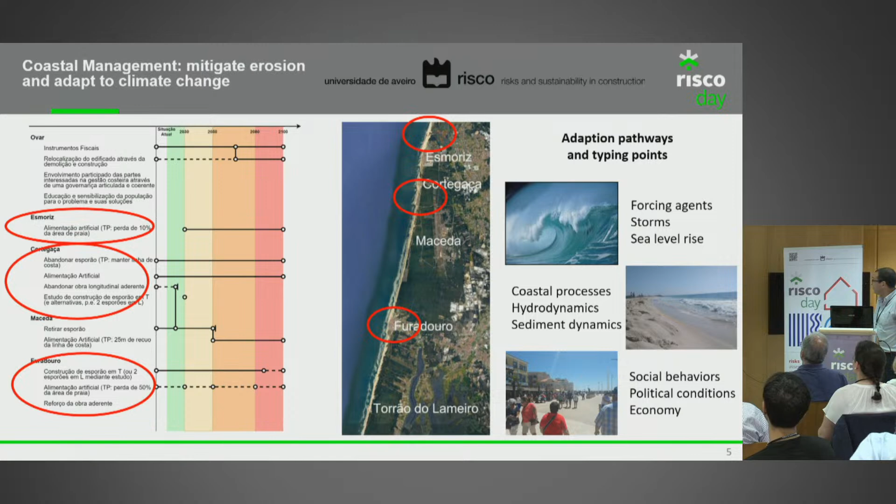Depending on that, we defined this adaptation pathway with some measures that should be taken considering the development of the coast, and for different places we can have different interventions along time.

At the end, this project's main results are a very complete website where we have all the information produced by the project. We have 53 different measures to apply on the coast, considering positive and negative impacts in the area of social impacts, environmental impacts, and economic impacts, in this kind of sheet.

We did 3 participatory workshops, and at the final seminar we produced 25 different sheets for cost-benefit assessment in different intervention scenarios, and we have a book with the adaptation plan for Ovar.

We also have the COAST4US project. We are trying to apply the COAST tool that was developed during a PhD thesis here at Aveiro University.

This is a project led by R5 consultant engineers and also includes R5 Marine Solution, a spin-off produced after the PhD. We are trying to test different shoreline evolution scenarios and discuss cost and benefit definition methods.

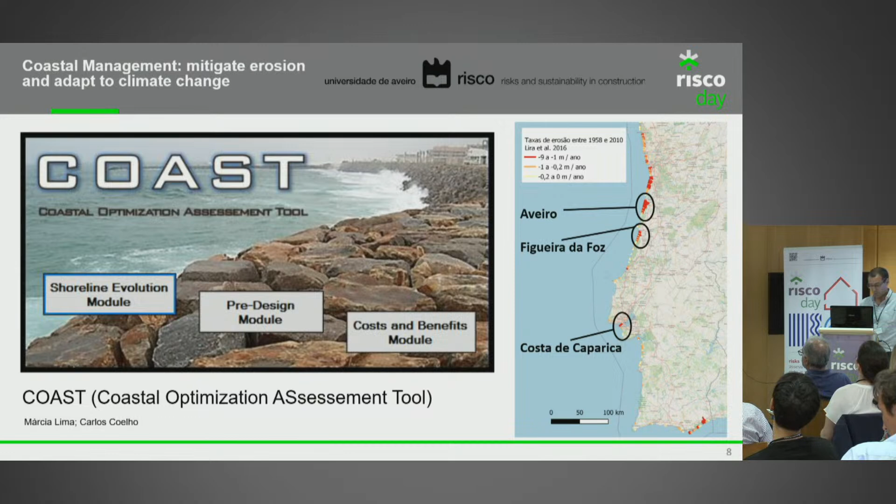We did projections over time for a time horizon of 20 years. We simulate several different intervention scenarios that include new or reshaped coastal structures, but also removal of coastal structures, and including also artificial nourishments of sediments.

Those scenarios were defined together with the coastal municipalities and the Portuguese environmental agencies that are in charge of coastal interventions. This is just an example of different scenarios that we did for the Aveiro coastal stretch.

If we do nothing, we have these losses along the different beaches in the Aveiro region in hectares. If we do some of these interventions, we can reduce the erosion or gain some territory, and these areas will then be transferred to a cost-benefit assessment.

Finally, the AX-COAST project. This is again a project led by the R5 companies with University of Aveiro and also an Iceland company.

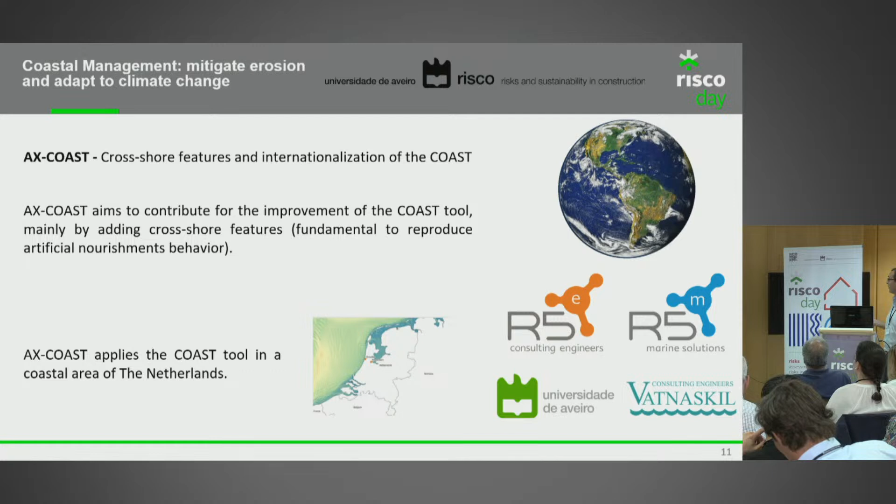The case study is in the Netherlands, and here we are trying to put the COAST tool in the international market, but also trying to improve the cross-shore features. So we are working with very simple models - we have the shoreline evolution model that doesn't consider transversal coastal processes, and we are adding a simplified model for cross-shore process that includes overwash, dune erosion, aeolian sediment transport, and sediment transport between the bar and the berm.

This will improve our capacity to better discuss artificial nourishments, namely the position of the nourishment in the cross-shore profile that the Portuguese Environmental Agency is always asking us about - where to put the sand, where the results are better.

We did some work on this, comparing two different cross-shore numerical models, discussing the sediment transport formulations, bed friction formulations, coefficients, and the acceleration factors. So those are preliminary results.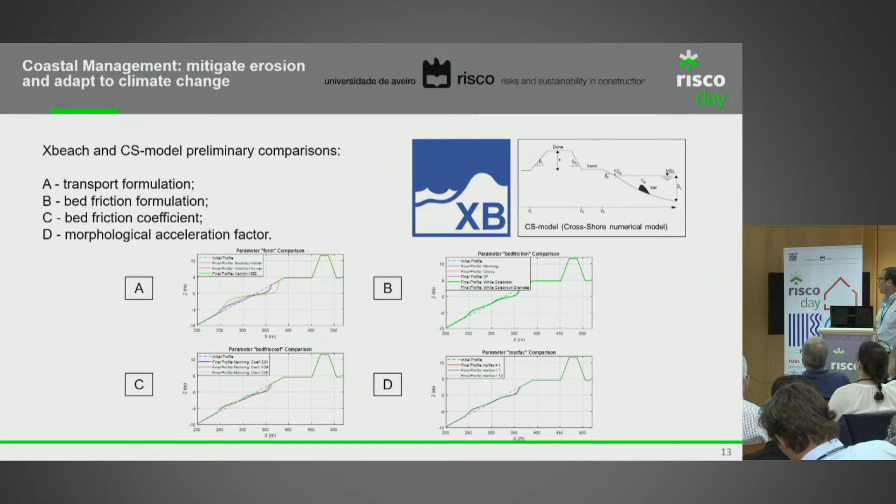Just to finish, some highlights of the research we are doing. We are working mainly with simplified models to project behaviors in a medium to long-term horizon, in very different areas - with people from economic areas, social areas, for participatory approaches with the environment department also. Our research mainly improves our capacity to answer the questions of society, so it's applied research, resulting in different consultant projects we have ongoing.

So this is my presentation. Thank you.

And now the final presentation is also from a researcher, our director, also linked to this sustainability area.

And we are in time, so don't worry. Okay.

Okay, so just to finish off, I picked 3 projects. They're more of an experimental nature, and they use, I would say, real-scale facilities and real-scale testing. So it makes it more interesting when you're working in this field of building physics and building technology.

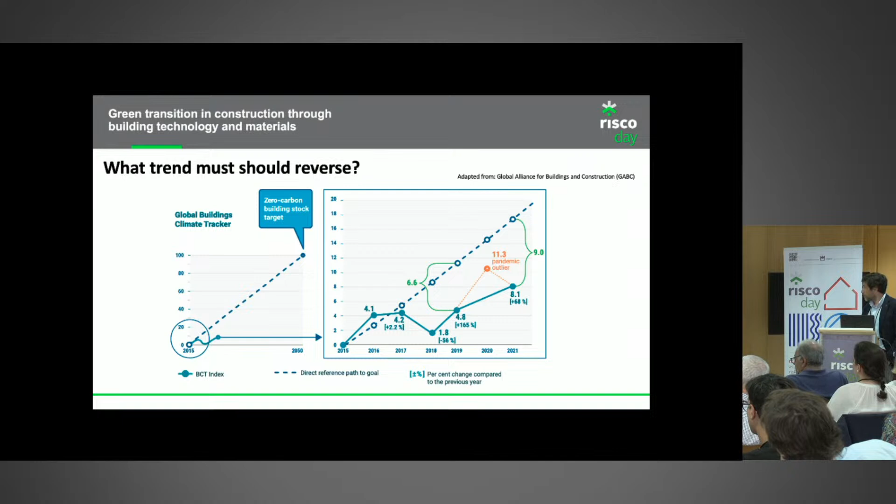And we're offset by, I would say, 50%. So the main challenges in the construction sector, amongst so many, are the lack of skilled labor, our role in decarbonization of the building and the economy through green jobs, the digitalization we talked about, and the circular economy.

We have tools, we have answers for this, but I would say everything goes through two challenges. The two challenges I think we have to effectively get to a trajectory towards zero are the design challenge and the materials challenge. And that's, I think, the only way we can get to carbon neutrality.

So there's a part of this problem that we can solve with smarter design. This means we can easily reduce 10% with less over-design. We can reduce up to 25% if we take sustainability principles into account when designing and refurbishing buildings. And if we don't do business as usual, we can go up to 50%. So part of the answer goes through more intelligent design.

And the other part of the answer would be through materials. Through materials, we have to shift the paradigm in the construction value chain.

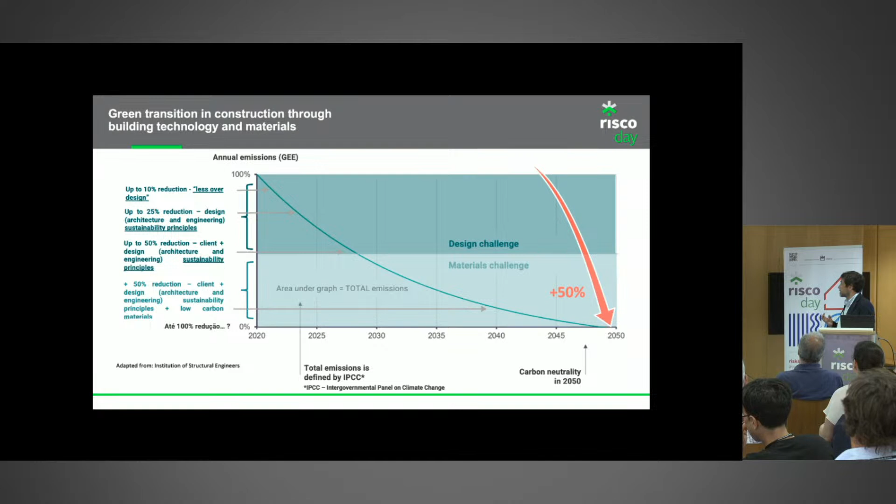When we talk about materials, we're talking about an alliance to low carbon materials. So we have to incorporate construction demolition waste into novel materials. We have to track down LCA, we have to track down what would be the carbon footprint of everything that we do in a building.

We have three drivers for change. These are the three drivers that Europe is investing on: the circular economy, carbon neutral solutions, and prefabrication, which I think will be a major player in the near future.

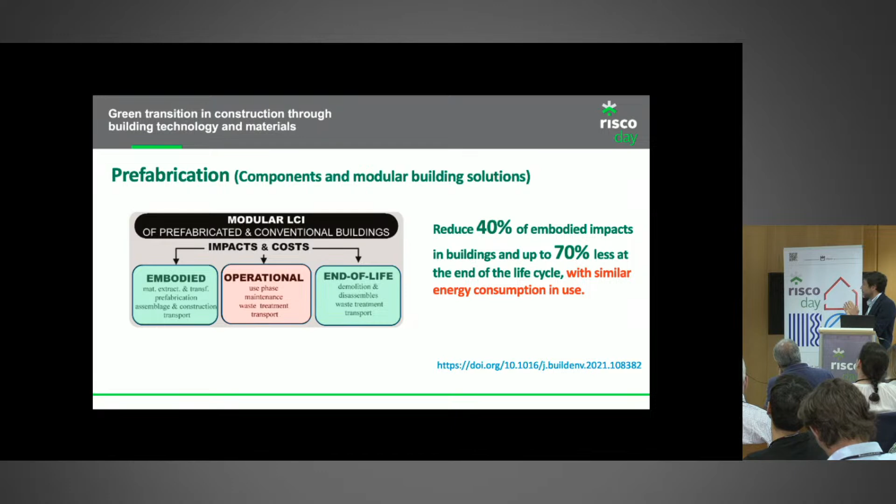Because when we think about a building operation, we will not save too much in terms of operational costs, but we can save a lot of money, and obviously a lot of carbon, by reducing embodied carbon in the first stage of construction and in the last stage. Numbers tell us we can reduce about 40% of embodied impacts in the first stage, and up to 70% at end of life, taking into account the same energy consumption in use of buildings.

So the first project I'll show you has these industrial partners. It's quite curious because one industrial partner sells blocks, and the other sells a prefabricated system. So it's heavyweight and lightweight.

They came together, and we have an experimental setup, which I'll show you in a moment, that compares two real scale constructed cell tests with the same conditions, same geometrical conditions, and the same thermal conditions. There was no problem comparing them because we had to understand exactly how lightweight construction, whether wood, LSF, or other types, compares with massive construction.

So we built these two test cells. You can see the LSF test cell and the hollow brick masonry test cell, representative of lightweight construction and heavyweight construction. You can see they have the same thermal properties, shown by the line at the end. So they're totally comparable - we measured them. Obviously, dynamically, they're not the same.

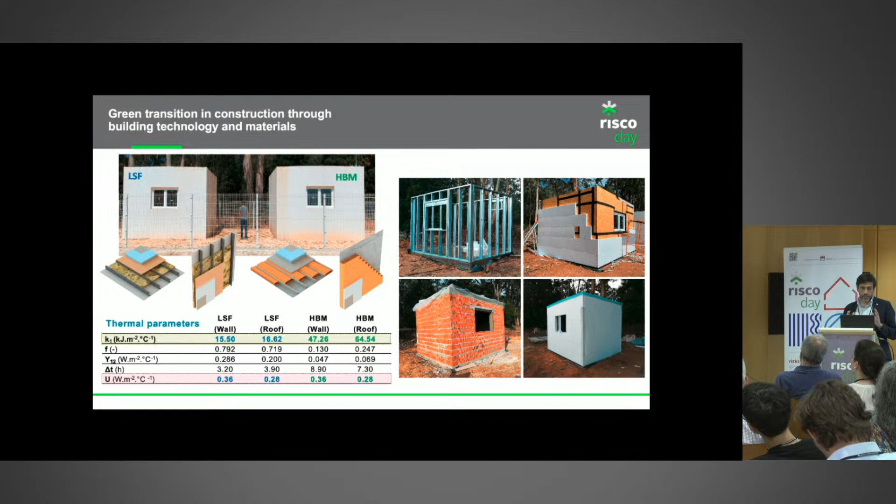What we did was monitor them over one year, and we understood, very interestingly, that there wasn't much difference in terms of thermal behavior of these two test cells. Actually, in the winter period, we can get more out of lightweight construction when we have more sunny days, compared to massive construction.

So we understood that LSF can be advantageous if we take into account, for example, the way we live in buildings - we cool and heat in an intermittent way, not continuously. That's really important because the way we live in buildings, we have to think about exactly how we want to construct them. If we know we live inside buildings with this type of schedule or living conditions, we can optimize heating and cooling strategies with the type of building fabric.

It was interesting to understand that besides temperature, we also monitored energy consumed for different heating profiles. We had an intermittent heating profile and a continuous heating profile. You can see that in every situation, the light steel frame or lightweight construction consumed less. This was the first thing we wanted to demystify, because people think lightweight construction obviously consumes more energy - in the winter period, this is obviously not true.

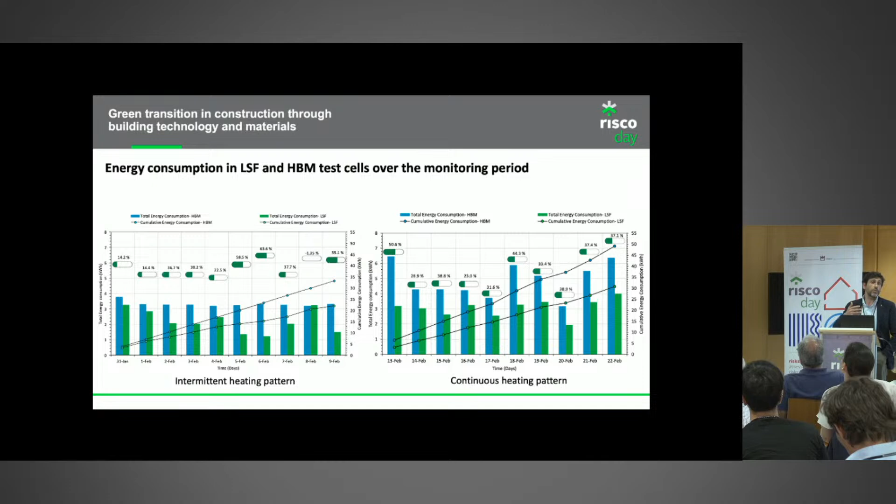In the summer period, we're tackling this now, actually it's ongoing. We're obviously waiting for some overheating in the lightweight construction, but we have an installation for ventilation to see exactly how much we have to ventilate to overcome this overheating.

A second project I'd like to show you is experimental - it's an FCT project that will finish at the end of 2024. It's on the development of a novel radiant floor system that will be used for cooling and for heating.

The novelty here is that we want to incorporate byproducts from the pulp industry and the steel industry—byproducts that the industry doesn't need—mixing them with smarter materials like phase change materials, so we can take into account more thermal inertia of the building fabric. This follows the tendency of thermally activated building systems, where the structure itself should have a role in climatizing a building, using materials to help damp indoor temperatures so we don't use so much energy.

We have a big experimental setup, not here at the university because it's quite big and we don't have space for it. We have 7 floor slabs and test 4 each time, each 1.5 by 1.5 meters. We monitor them over time with thermal imaging, with sensors inside, and we control water flow because it's a hydronic system for cooling and heating.

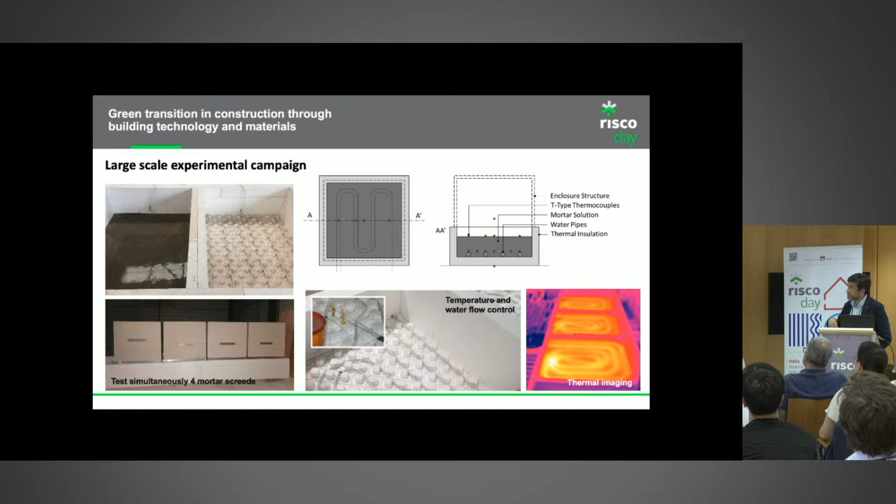Obviously there's a lot to optimize here—control, layers, geometry, water flow—but the idea is to tackle all these issues in terms of materials, control, and layer distribution. Numerical simulation will help because walls, ceilings, and floors have different coverings, and the covering will impact how these systems work. We're talking about radiant systems for floors, but also walls or ceilings, which you can find in Northern European countries.

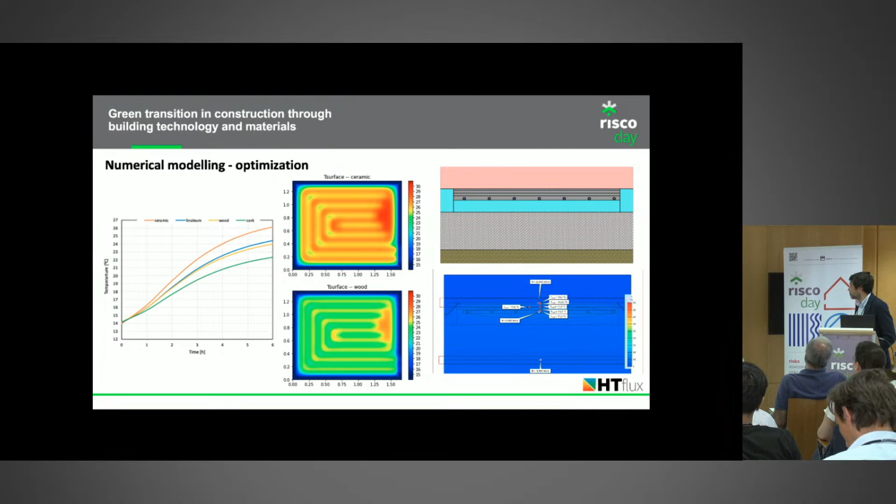The last project is still ongoing, in the middle now, and it's very interesting because of the partners involved—not all here, but these are the ones we interact with most—since we're developing a construction system that's totally dismountable and sensored, for example for hospitality reasons. The idea was developing a prefabricated system to shelter the elderly, since population is aging and we need to decentralize our healthcare system, requiring new infrastructure. This consortium is very big, but we're partners in one of the sub-projects.

In one of these sub-projects, we're developing the system with players like Sonae Arauco and IKEA—a system with no bolts or screws. It's a prefabricated system made out of timber fiber materials, totally dismantleable, into which you can incorporate building systems. The idea is for this system to go up to 2 floors, be totally dismountable, and be sensored for temperature, relative humidity, vibration in case of someone falling, leaks, gas, with printed sensors incorporated into the structure in strategic areas.